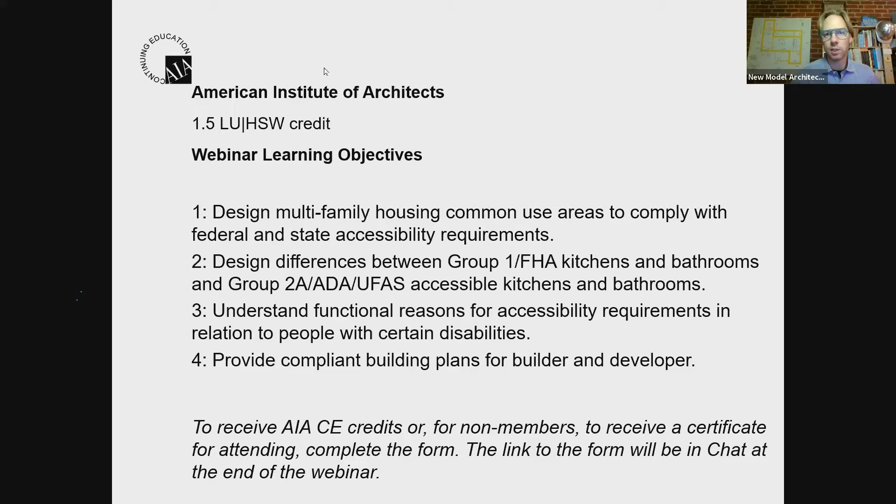Good morning, everybody. Welcome to part 2 of Untangling Housing and Accessibility Requirements in Massachusetts. Part 1 was on scoping, part 2 is on design. We've got some participants who are here this week who were not here last week, so I'm going to go over some very basic stuff just to introduce myself.

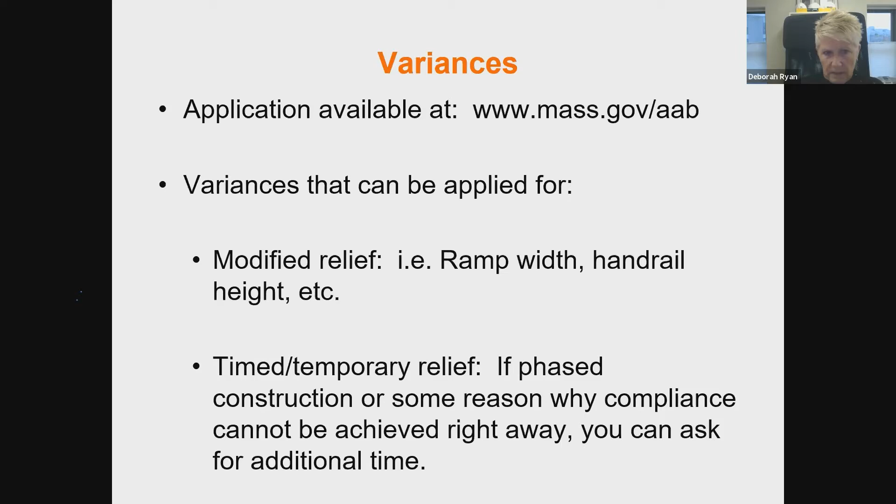So the variance, again, as I stated earlier, you can download the new variance application right on the web. You fill out the application and provide supporting documentation. I recommend that you make the application as clear as possible on the issue you are requesting. Plans, color-coded plans, photos of the issue you are requesting, extremely helpful. So if you're requesting a variance for the width of a ramp and it's existing, send a photo of the ramp, maybe with a tape measure on the ramp, show what the confining issues are, to make it easy for the board to understand what it is.

You're the one that's familiar with your building. The board generally is not, unless they happen to live in your community. So it's really helpful to give them as much information as possible. Next slide.

As part of the application, you have to fill out what I mentioned before, the service notice. You have to send a copy of your application to the local building official, the Independent Living Center, and the local Disability Commission. Those are the folks that are living in the city or town where your project is. And if they have any additional information or want to offer support or opposition, they will be able to do that. And there'll be a 2-week wait period for the board to receive any comments from them. Recently, again, the service notice you used to have to notarize. That has been done away with, which is great.

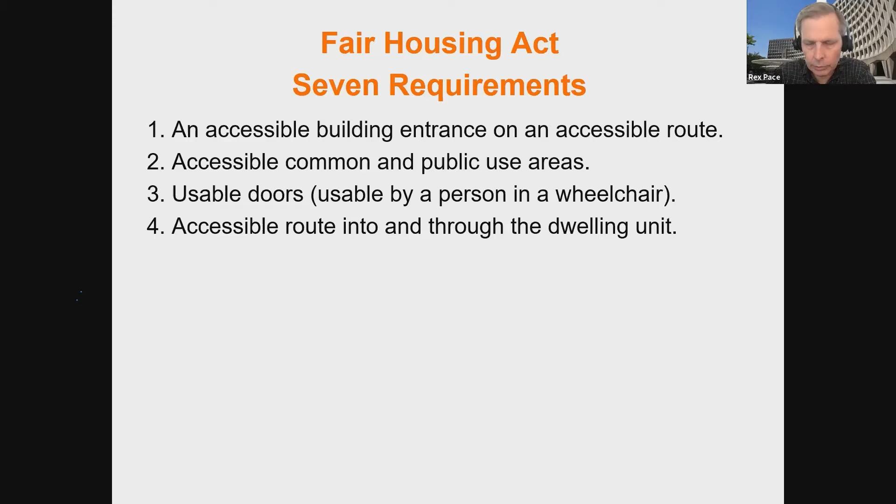And then there's a requirement for usable doors, which will be mostly like you think it should be, except in the interior of the units it's a little different than it would be normally. It's basically passage doors. Requirement 4 deals with the accessible route into and through the covered dwelling unit itself, which can be a little different than the public and common use spaces.

Number 5, again, this is in the covered dwelling unit itself. It's the requirement for accessible environmental controls, basically. And number 6 is the provision that requires reinforcing in bathrooms for later installation of grab bars. And number 7 regards usable kitchens and bathrooms. It's really about clear floor and maneuvering space in these areas.

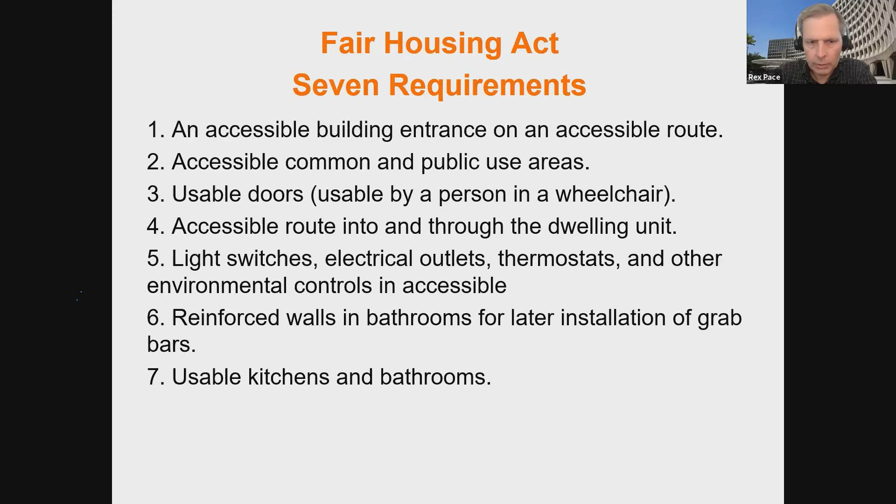So there's 7 requirements, although they do vary a lot in their scope. Some of them are very broad, some of them are very focused. In addition, one thing to keep in mind is that there's really not a standard for fair housing. It's not like a building code like you have for Massachusetts, or standards you have for the ADA or the Rehabilitation Act, Section 504. It really was intended to have guidelines to give builders and so forth flexibility.

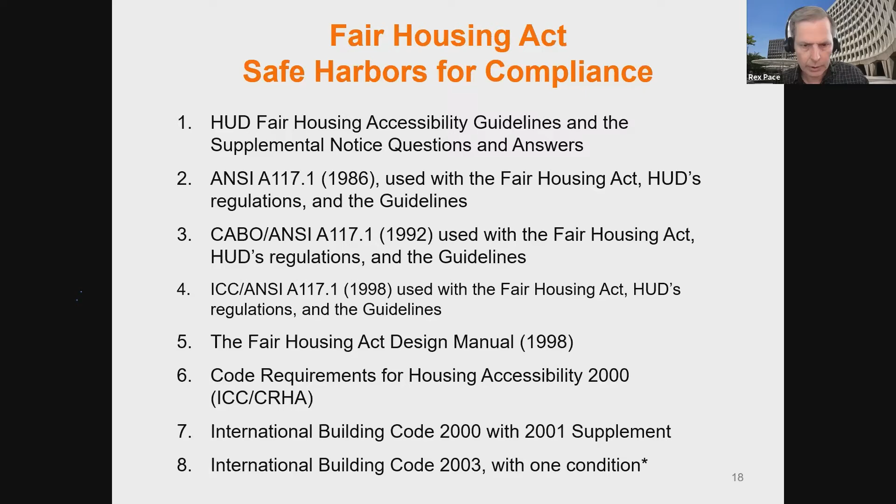And this is basically an effort to be consistent with the IBC, so that when a state adopts that code, you can follow the state code and have a pretty good assurance that you're meeting the obligations of fair housing. Just make sure that the state you're working with adopted one of the safe harbors on this list. And a very helpful resource is the Fair Housing Act Design Manual. It's got illustrations. It's what a lot of people refer to, and other than the guidelines themselves, it's probably the most commonly used safe harbor there is. So with that, we'll move on to the next topic.

Okay, so now I'm going to talk about the Rehabilitation Act, Section 504, as I discussed last time. These are the regulations specific to the Department of Housing and Urban Development. This is when you're a recipient of federal funding, and when you do that, you have to do requirements that are very much like you would find in the ADA for the 5% and 2%, which we talked about last time. These are the mobility accessible units, and the units that are accessible for people with communications disabilities, primarily hearing and vision disabilities.

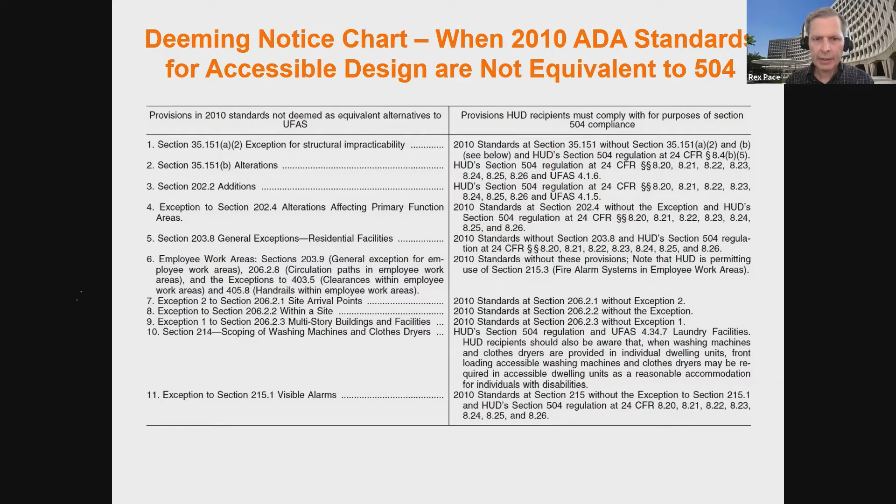Okay, so just to mention, it's not just HUD that provides funding for housing, although it is the main provider, but we also do have money from the U.S. Department of Agriculture Rural Development Programs, and they use UFAS as the design standard.

So unlike HUD, which has a section on housing in their 504 regulations, Rural Development Department of Agriculture does not have a section specifically on multifamily housing, and they just refer us to UFAS. So that's where we look to for all of the design standards if you're receiving federal funding from rural development.

Dave? Thanks, Kathy.

So I just wanted to take a moment to update everyone on the standards we have issued under the ADA that date to 2010. As Rex mentioned, there are some differences from the UFAS standard, which are really called out for purposes of anyone wanting to use the ADA standards but still meet some of the UFAS requirements that are more stringent. That's what would be necessary under 504, because so much housing covered by the ADA is also subject to 504 with respect to state and local governments.

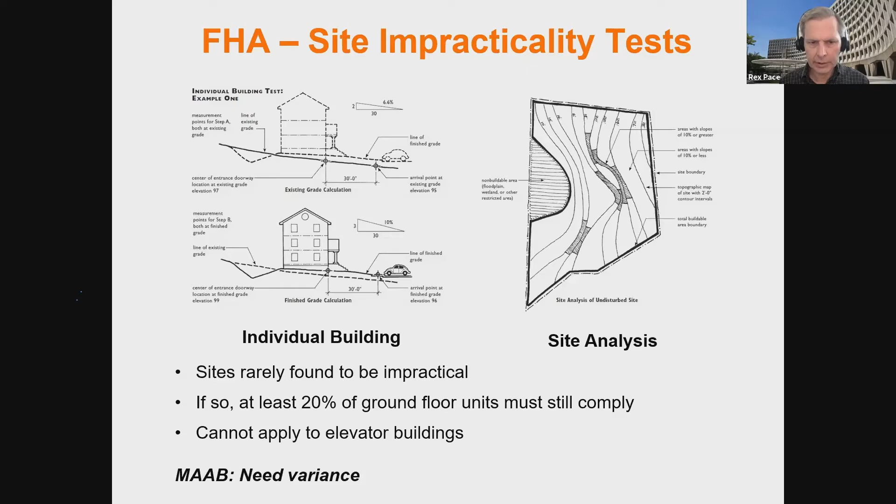And then another thing to remember is that this does not apply to elevator buildings. So we're only talking about buildings that are walk-ups. In Massachusetts, there is no exemption. You would need a variance, and again, you'd need to prove that it was either technologically infeasible or excessive cost without substantial benefit. Great. Dave?

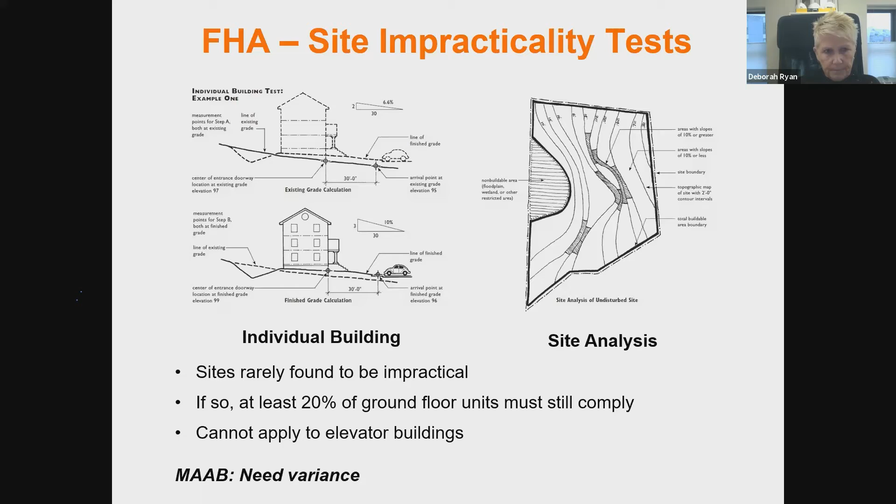Under the ADA, there is an exception based on structural impracticability, which is a very high test, because this is basically a basis for departure permitted in new construction. And it's really intended to cover those very unique and rare circumstances where compliance is not possible, even in new construction. It is not intended just based on, say, steep terrain. It's got to be involving more unique and impactful constraints in order for it to be used.

Now, we do want to point out that this exception previously used to be located in the substance of the standards, but is now located in the implementing regulations that are issued by the Department of Justice. So for tracking down this exception, you could find it in the Department of Justice's Title II regulation for state or local governments at the section cited here, 35.151(a)(2).

And with respect to Title III facilities, with respect to any kind of housing that is covered by the ADA in the private sector, again, functioning as a place of public accommodation, the exception for structural impracticability is found in the Title III regulation for commercial facilities and public accommodations at section 36.401(c).

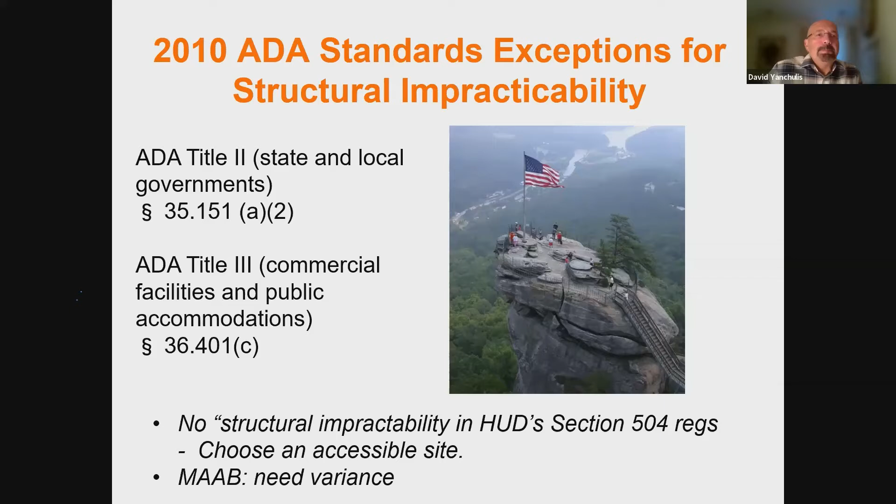Yeah, you could contact us or the Department of Justice for informal guidance on whether a certain issue or constraint for departure is, in our informal opinion, considered to rise to the level of structurally impractical. I really think it is something like you're seeing on screen. It really is something that severe.

Okay, let's talk about entrances. Deb? Sure. So under the AAB regs, all entrances to units in the building must be accessible. And one thing that the board has seen in the past is a facade trying to look like entrances with front stoops. If those are actually entrances to units, they all have to comply, even if there's a common corridor in the building that provides actually the main entrance to the unit. If these are used as entrances, they must comply with the requirements.

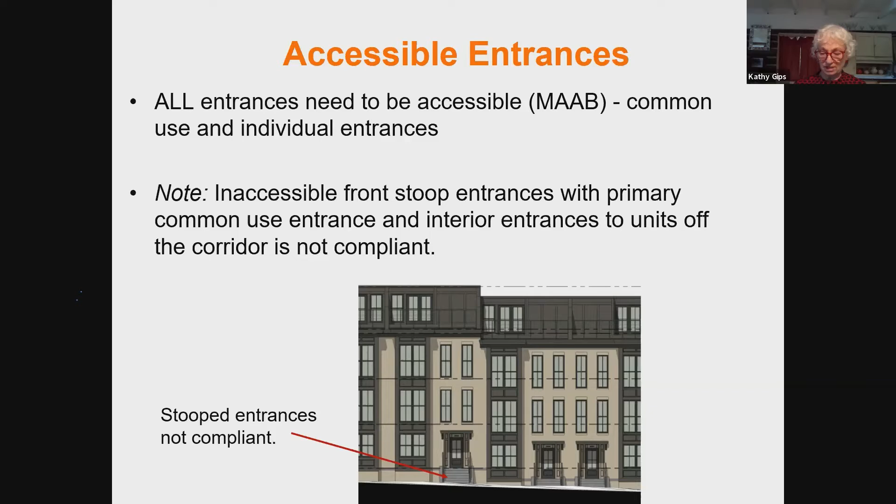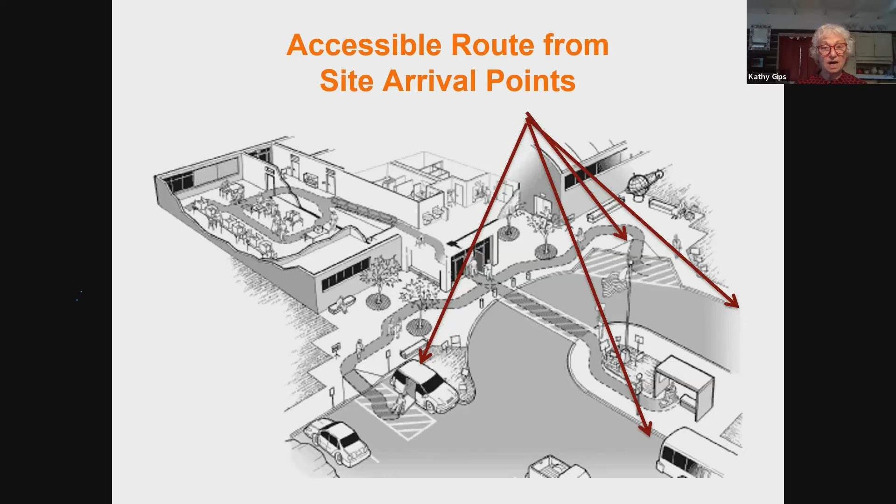Great. And we're not going to go over UFAS or ADA or FHA, since we're in Massachusetts and MAAB sort of covers it and tells us that all entrances have to be accessible. So accessible routes. We're looking for accessible routes from site arrival points, be it the sidewalk, the passenger drop-off area, the accessible parking, or if there's transportation on the site itself. Deb?

So accessible routes to common and public use areas. There's a lot of housing being developed where there are lots of activities going on the site. Some developments will have mail buildings, community centers, recreational activities, dog parks. All of the routes that lead to those facilities must be accessible. So anytime you construct a route on a site, it has to be accessible unless you get a variance from the AAB.

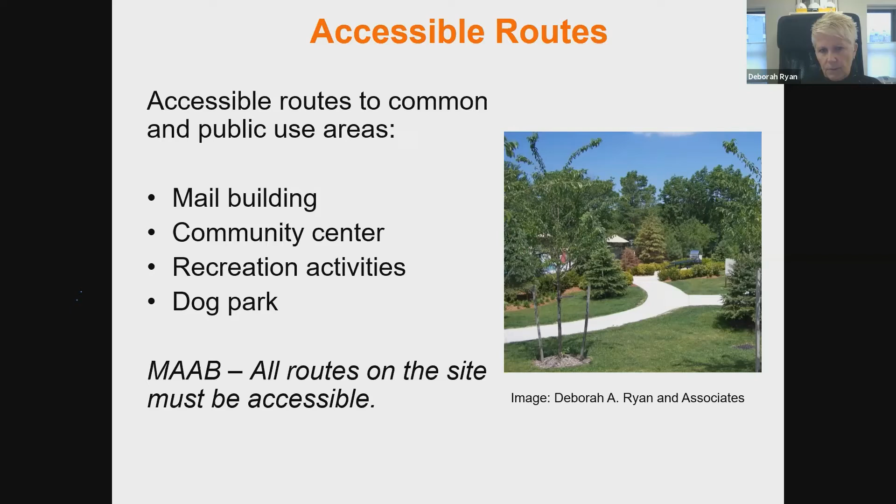Some of the things that I've seen out in the field and you need to watch out for is access to all of these kind of common spaces like mailboxes, being able to get up onto the sidewalk, access a mailbox if it's outside. Next slide. There are recreational areas such as picnic tables, places where people can go and hang out. Make sure you provide accessible routes so that all residents have access to those things.

Trash areas, a lot of developments will have one common exterior trash area. Make sure you have accessible routes to all the trash areas, not just one. And then I'm just going to bop in here to sort of remind everybody what the accessible route requirements are. I know most of you are familiar with this, but stable, firm, and slip resistant. So it doesn't have to be paved. It just has to meet this standard of stable, firm, and slip resistant. 36-inch minimum width, cross slope 2% maximum, and running slope 5% maximum.

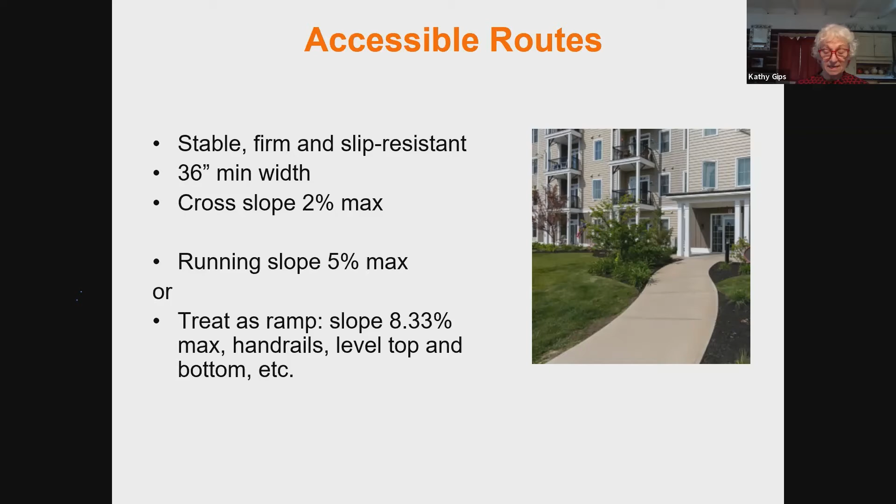And the reason I emphasize this is because I see a lot of sites where the running slope is more than 5%. And if it's more than 5%, it needs to be treated as a ramp. That means you're going to have handrails, you're going to have a level space at the top and bottom and every 30 feet. So it's going to be a lot more expensive, and it's a lot more difficult for people to traverse. If you've ever been in a wheelchair, or pushed somebody in a wheelchair, or rolled a heavy suitcase up a ramp, you know that it's fairly steep. So we really encourage people to get to that 5% or lower grade, also because if it's any steeper than that, it's considered to be a ramp.

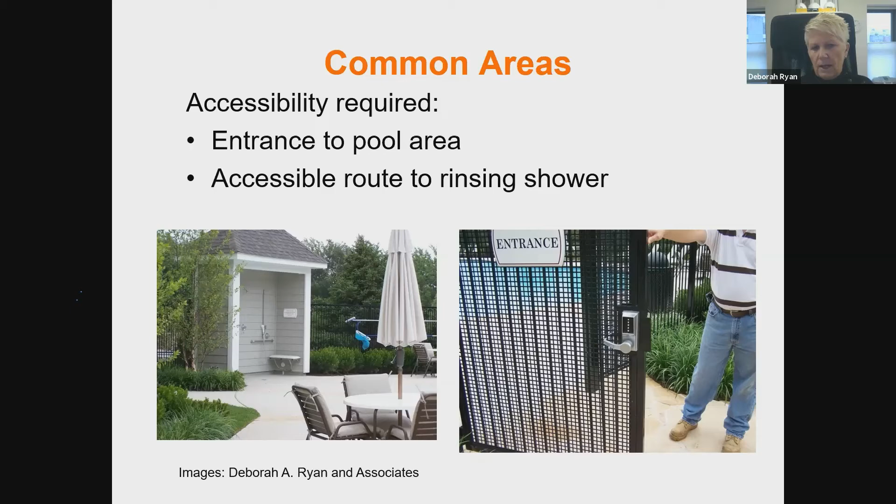Next slide. Also, accessibility is required to get into the pool area. I see a lot of pool gates where either the hardware isn't compliant or they fail to remember that you need the clearance on the pool side and you need to extend the walkway on both sides of the gate. Rinsing showers outside, you have to be able to get to them. Next slide. Laundry facilities, if they're a common laundry. Recreational areas, if you have paths that people are walking on.

Swimming pools, the AAB does require access into the swimming pool. It is not as specific as what is required under FHA or ADA. So there's a little difference in that, and maybe Rex or Dave can speak to that, but in the AAB, it just says a lift, but it doesn't tell you too much about what's required. Dave, you want to pop in here?

Yes. So the ADA standards have very descriptive requirements for lift or sloped entry access into pools, and they would be applicable to any kind of common use area, including a swimming pool provided on a facility covered as housing. Now, when we get the question about a privately owned condominium or apartment building, the ADA's coverage of pools and other common use areas, which again are very detailed, is only going to apply if the pool is more or less open to the general public as a public accommodation. If it's a common use area available only to residents and their guests in the privately owned building, it may not be covered by the ADA.

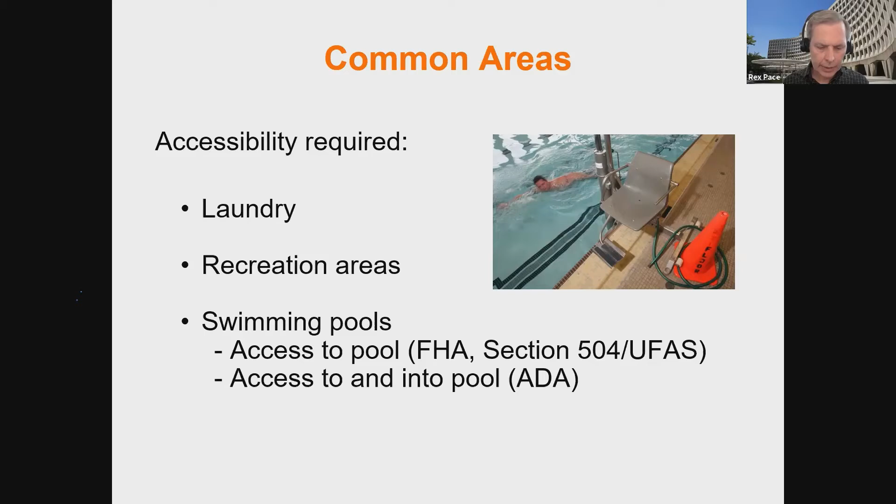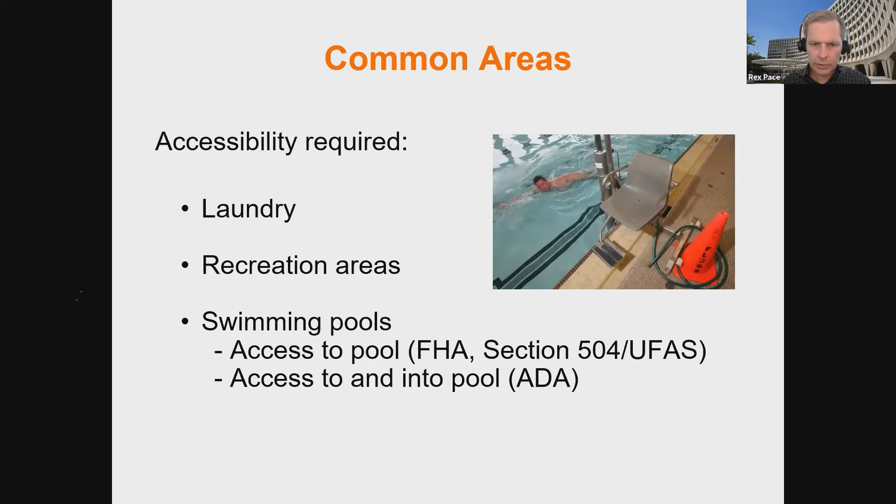And in regard to fair housing, the fair housing guidelines themselves are not nearly as comprehensive as the ADA. It's really, is the pool on an accessible route? Can you get to the pool? It has no requirement for a lift. However, if you're using one of the safe harbors other than the guidelines themselves, particularly the later ones, the IBC has a tendency to track the ADA requirements. So you may have a requirement for a pool lift or one of the other types of entries similar to the ADA. It's definitely at this point something I would go to the trouble to pay attention to and assess what's appropriate given the safe harbor you're using.

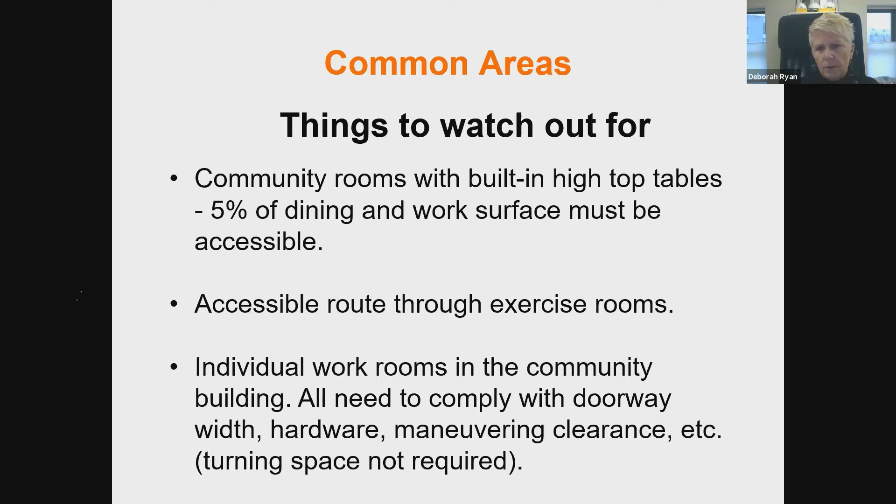Great. Deb? Yeah, things to watch out for that I see frequently. Community rooms with built-in high top tables. You need 5% of the dining or work surfaces to be accessible.

Lots of community facilities now, community buildings and market rate housing, are pretty elaborate, have bars and seating and all kinds of stuff. So just be cautious of that. A lot of them have gyms and exercise rooms. Make sure you have an accessible route to get through the room. Individual workrooms in the community building all need to comply.

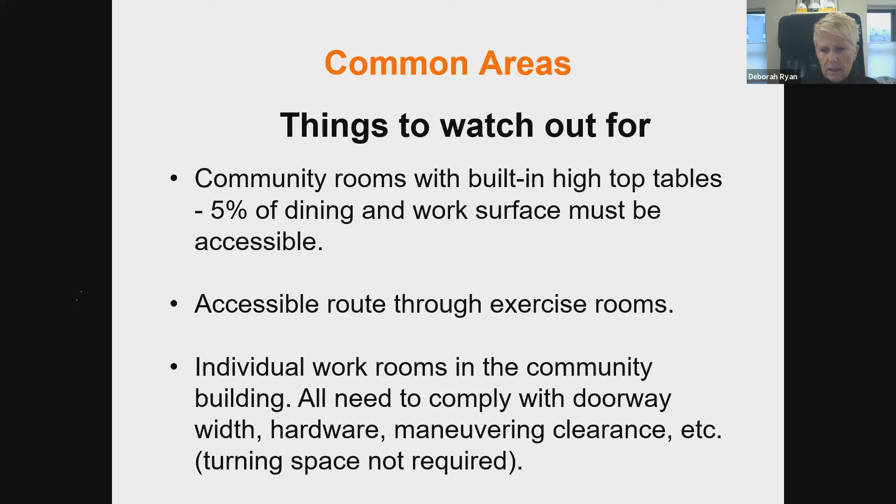I've seen places where there are small cabanas or small little meeting rooms or individual rooms where people can go work. Due to COVID, people might not want to work in their home, but can go into this little workroom. They all need to comply with doorway width, clearance, hardware, and maneuvering clearance. Turning space isn't required, but you have to be able to get in the room. As I said, individual cabanas on a pool deck I have seen, they all need to comply with the requirements.

Exterior bars, gas grills, all kinds of amenity spaces in multi-unit developments that I see that people get hung up on. So just make sure for gas grills, all the controls and operating mechanisms are within reach range, and that all amenity spaces be accessible. I've seen bocce courts and things like that.

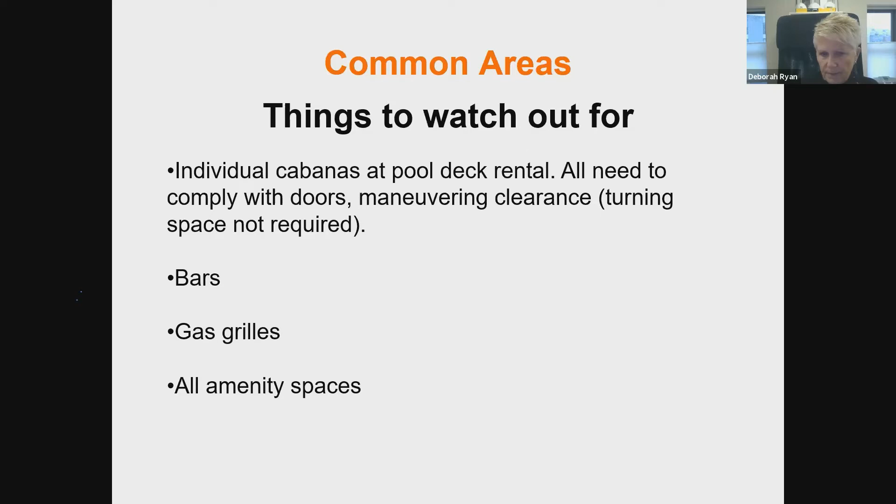So one of the other big ones that I see are dog washing areas. Make sure that the controls to operate the actual dog wash are within reach range. A lot of that is dependent on the equipment that's provided, but you want to make sure that you can access the controls for those things.

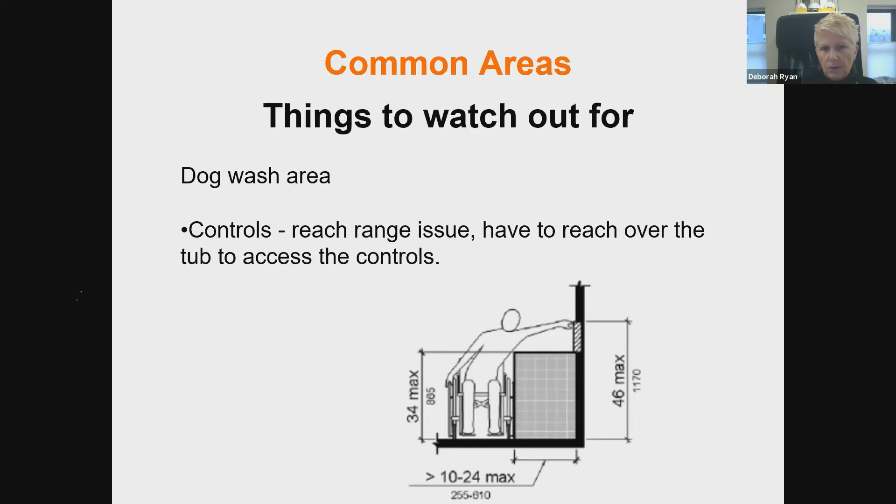Mailboxes are another thing. Sometimes there's a little bit of confusion between the U.S. Postal Service and what the accessibility requirements are, but MAAB still allows a 54-inch high side reach. So all mailboxes would be required to be no higher than 54 inches to the highest operable part. ADA goes down to 48, but Dave can speak to that, only serving the accessible units, I believe.

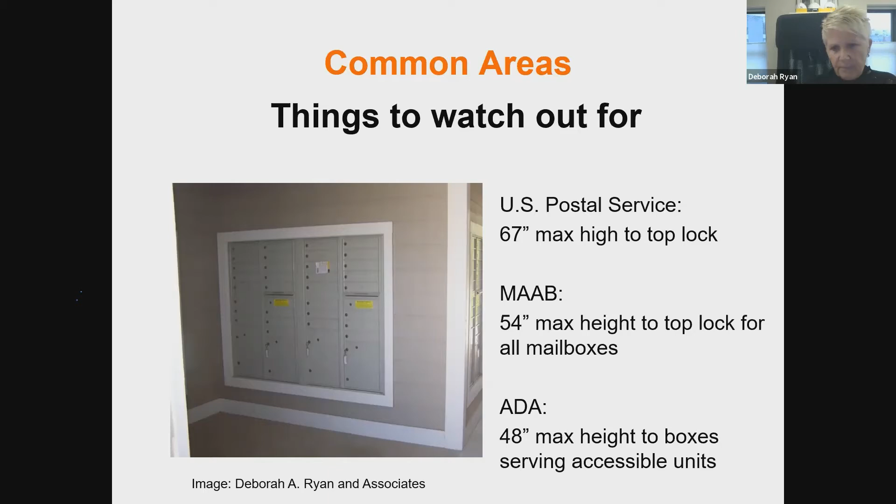That's correct, Debbie. So mailboxes for the 5% of units required to be mobility accessible would have to be within accessible reach range of maximum 48 inches. So that's a little different than the MAAB.

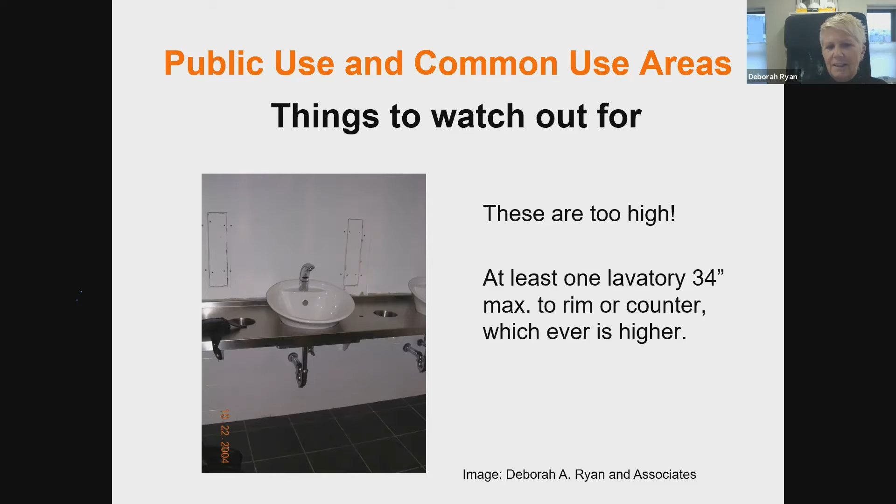Okay, just talk a little bit about vertical access in the building, because this is probably one of the most frequent questions we get: is an elevator required in my multifamily housing new construction? And just to clarify, an elevator is not required as long as the residential dwelling units with mobility features, the common use areas that serve those units, and the public use areas serving the residential dwelling units are all on an accessible route.

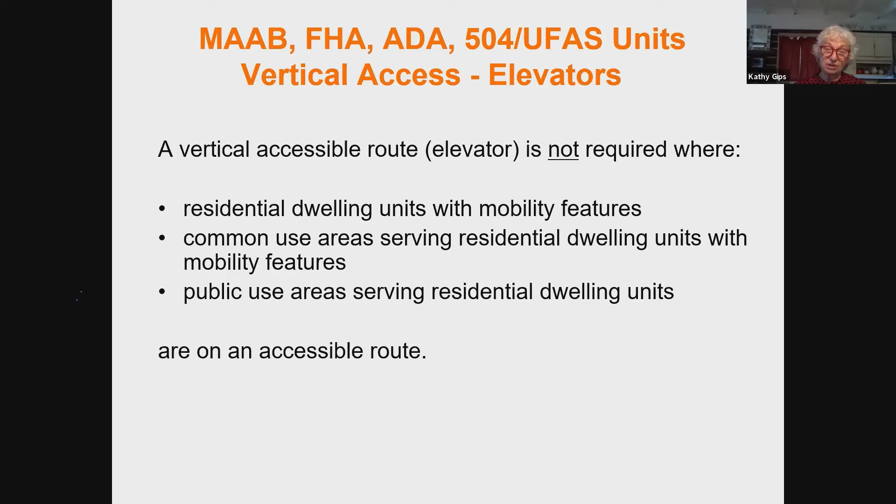So if you have a two-story building, let's say, you're not planning to put in an elevator, and you have all of the accessible units on the first floor, that's fine. And you're not required to have an elevator in the building. You just need to make sure that somebody can get to all the common use areas that serve it, the public use areas that serve it. So generally an elevator is not required, but Rex, do you want to pop in on this one?

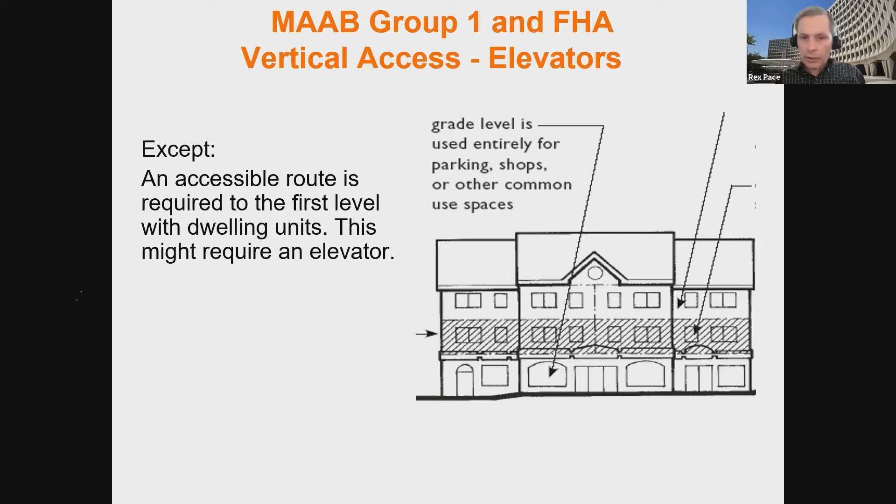Yeah, so as we discussed last time, all ground floor units are covered. Sometimes, from an outward appearance, a building doesn't seem to have ground floor dwelling units, but in fact, your first story of units will be your ground floor. For instance, here we have shops and so forth underneath, and those single story units above do have to comply with fair housing. So let's go to the next slide. Now, you're not required to necessarily have more than one ground floor.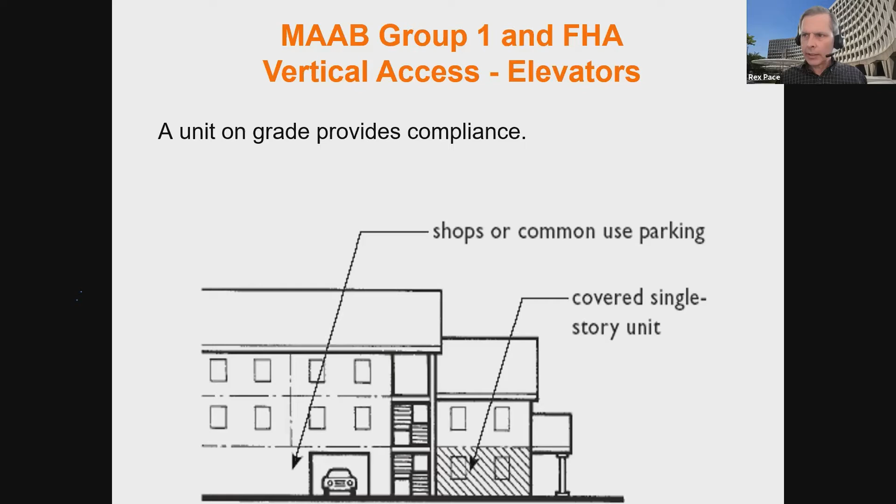Did you have any comments on this, Deborah? No, the AAB would be the same. Okay, I just want to make sure. So I think that pretty much covers it. Did you have any other questions, Kathy? No, that's great. So we're going to get right into the dwelling units. We've covered sort of getting to the dwelling units, and now we will talk about the dwelling units.

Rex? So the fair housing guidelines require for the units that are covered that you have an accessible route that goes into and through the unit and takes you to all the areas that are going to be used. There are a few notes I would make about this. For instance, once you get inside the unit, you don't have to provide maneuvering clearances at the doors. If a unit has a loft, it's still considered a single story unit, and there are certain stipulations on that, but you wouldn't have to have the accessible route to the loft or to an unfinished basement.

So there is a requirement for an accessible route. The route itself is very much like you would find in something like the ADA, but the extent of it will probably be less. Great, and I think this is a good time to clarify for all of the laws that we're talking about what the requirements are for interior doors in the unit. So Deb, anything group one or group two?

Yes, so under the AAB, all doors within a group one unit, as well as group two, need to comply or be capable of complying with the requirements. So for the maneuvering clearance on doors, for example, you can have a door swing in and not have the 18 inches of clearance on the pull side if it can be adapted in the future to provide that clearance. So the way the language works is it either complies or is capable of complying. There are no exceptions for sunken living rooms or dining rooms or lofts. They all have to be on an accessible route. I'm glad you mentioned that, Debbie, because you do have some provisions for sunken areas, like in living rooms. They are permissible to an extent.

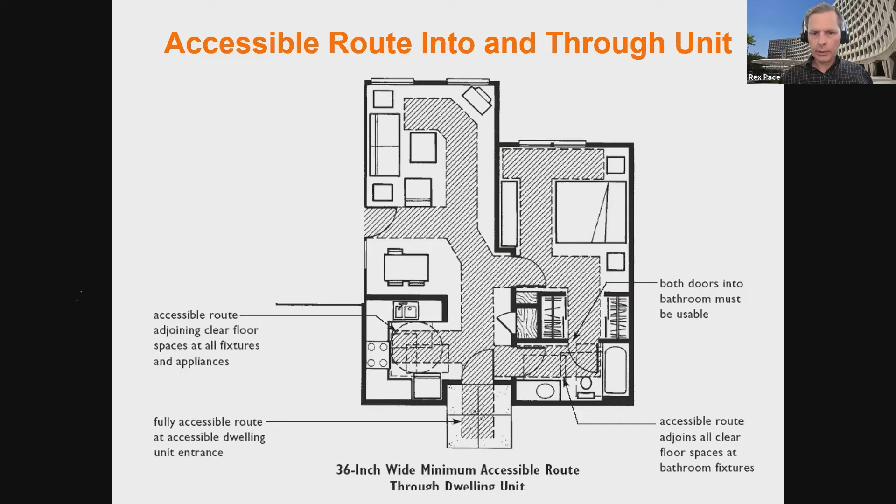So now another thing about the accessible route requirement under fair housing is it does have some differences in what's a permissible change in heights from interior to exterior spaces that would probably exceed what would be permissible under the ADA. And this is at the secondary entrance. The primary entrance is going to pretty much track what's in the ADA on the exterior side in terms of the threshold, like your entry door into the unit. But if the secondary entrance is out to a balcony or a patio, they're going to be a little different.

First off, if you have a pervious surface, like a wood deck, you can set that deck a 1/2 inch below the interior floor level. So then you would additionally have the permissible height threshold. So you can see that's probably going to be something that would not be permissible under the ADA, because it's going to be too much of an overall height change for an accessible route.

Now, the big difference is when you have an impervious surface, such as a concrete balcony, for instance, you're permitted to go 4 inches from the interior finished floor level down to the top of that exterior impervious surface. So that's a pretty big difference. The belief is that you could come back and modify that with a raised deck. There's a little image on the bottom of the slide that shows where somebody's done an insert that would raise up that level. So the idea is that a later tenant modification would be possible to address this.

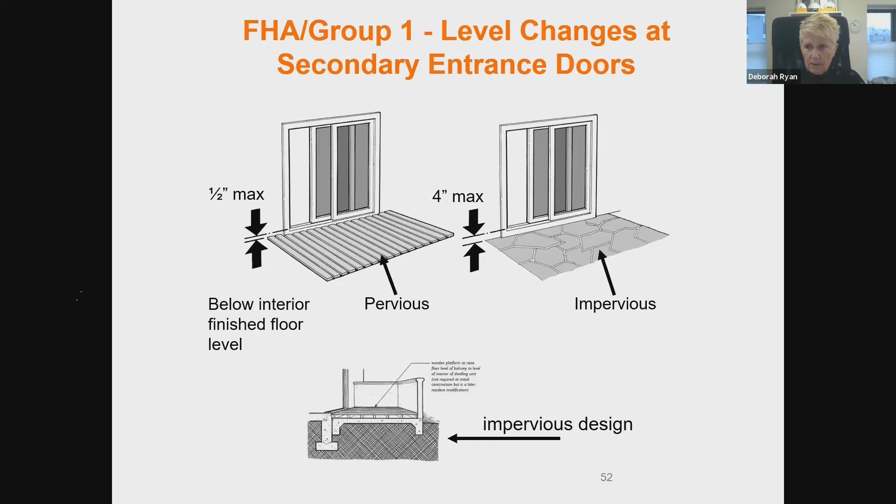You should be capable of providing raised decking, which would be level with the floor inside. One thing to be cautious about is that if you do provide that raised decking, you should check the height of your handrails that surround the deck, because by building code, they may have to be a certain height. And once you add raised decking onto that, you may be below that. So something to look at.

Great. And Dave, for the ADA units? Yes, this is an important difference because the ADA standards are more stringent in that they don't really provide any allowance for the transition from interior to an exterior space. You need to treat it as any other door threshold, which would permit a 1/2 inch maximum for the threshold or change in level. If that threshold is higher than 1/4 inch, it has to be beveled, maximum 1 to 2, but the total change in elevation can't exceed 1/2 inch.

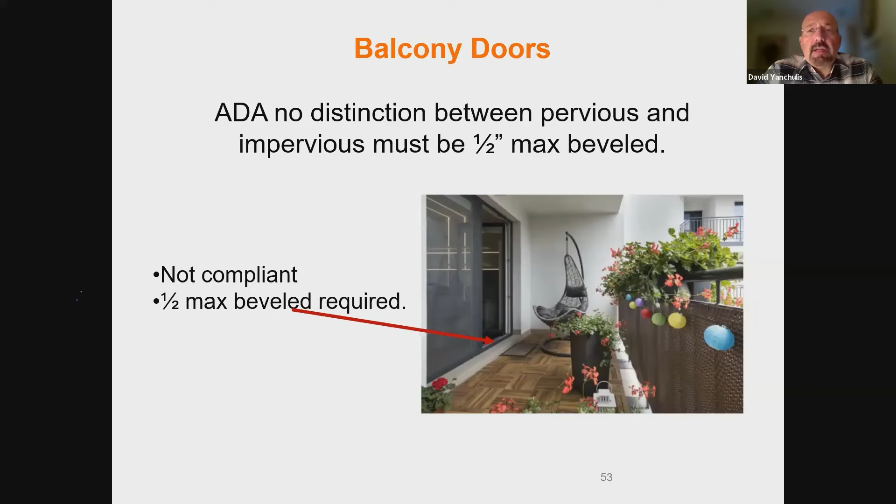Okay, Deb? Okay, so things to look out for with controls and outlets. Although this is actually an FHA requirement, not an AAB requirement, because AAB has not amended its regs to bring the reach range down to 48 inches. But so for switches, light switches and things like that, 48 inches maximum.

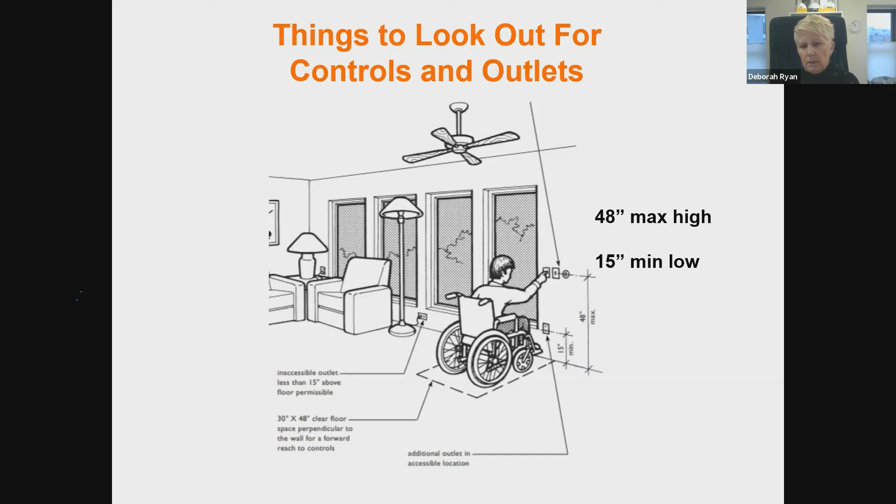To the highest operable part, I usually recommend that people put the electrical box at 48 inches to the top of the box, so they'll always ensure that 48 meets the top of the switch, because depending on the type of switch you install, the actual top of the switch could be higher than 48. So putting the box in at 48 to top of box will take care of that. And then the lower outlet's 15 inches. So it's making sure you check before the sheetrock goes up, so you don't have to undo it. It's easier to move the box during the phase on the left than it is on the right.

Things to look out for are the outlets underneath windows. Because the electrical code requires outlets so many feet, you may end up with an outlet underneath the window, and technically you need to request a variance from the AAB if you cannot meet the 15-inch minimum to the center line of the lowest receptacle.

So Deb, I had a question. Go ahead. Are all controls covered under the Massachusetts code? Yes. All right, so in fair housing, so it is more stringent. In that respect, I want to point out, because it's less stringent in fair housing, you do have in the guidelines a little bit of a stipulation for what are called comparable controls. For instance, if you have 2 light switches that operate the same light, it's possible that you could just do one. Right. It really depends on the situation. You need to be careful with that, because it really is intended for redundant controls.

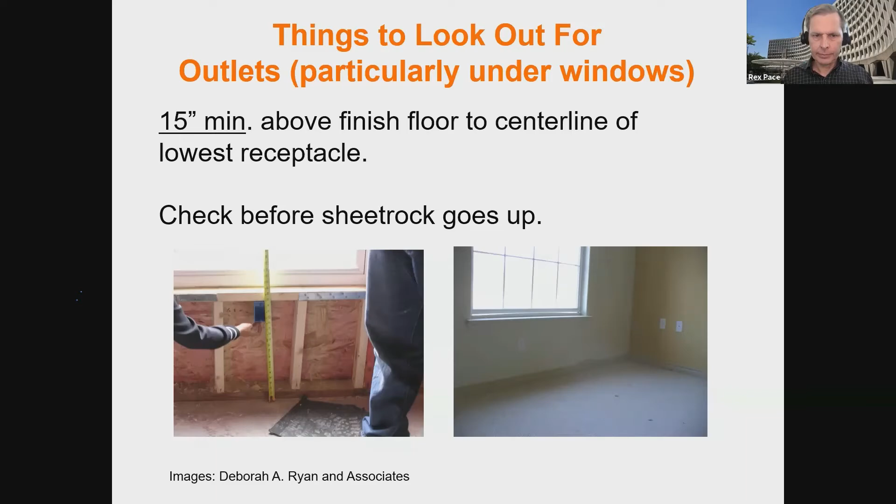Yep. Great. All right, we're going to get into the bathrooms and the kitchens for Group 1 and the Fair Housing Act units. So Rex? So this is requirement, I believe we're on requirement 7 of the design and construction, which really deals with the clear floor spaces in bathrooms and kitchens. Right now, we're going to talk about bathrooms.

You'll see clear floor spaces for toilets are very similar looking to what you see in UFAS or ADA, but they are very different in that, for instance, things can overlap the clear floor space that would not be permissible under the ADA or UFAS. For instance, here we see that the bathroom vanity is overlapping the space for the toilet, so be careful about that. You're required to have a 30 by 48 inch space at the lavatory.

This can be forward or side approach. Again, a big difference. You don't have to have a knee space. You can do forward approaches, and that may actually be for other design reasons desirable in some instances. If you do that, you are permitted to have an adaptable cabinet, and we'll talk a little bit more about that in a minute.

And there's also, I don't recall, Kathy, if we were talking about A and B specifications, but you do have 2 different specifications you can use for bathrooms that do change things a little bit. Primarily the maneuvering space at a bathtub is what it really affects. Under the one specification, the toilet could be next to the tub. Under the other specification, specification B, you have to have the 30 by 48 clear at the control wall of the tub.

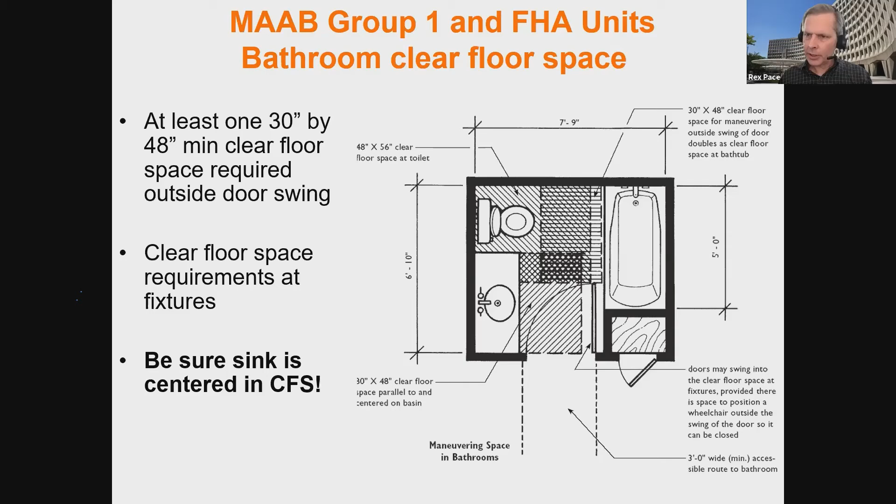And I think that pretty much covers it, Kathy. I think we'll go into a little bit more detail as we go along.

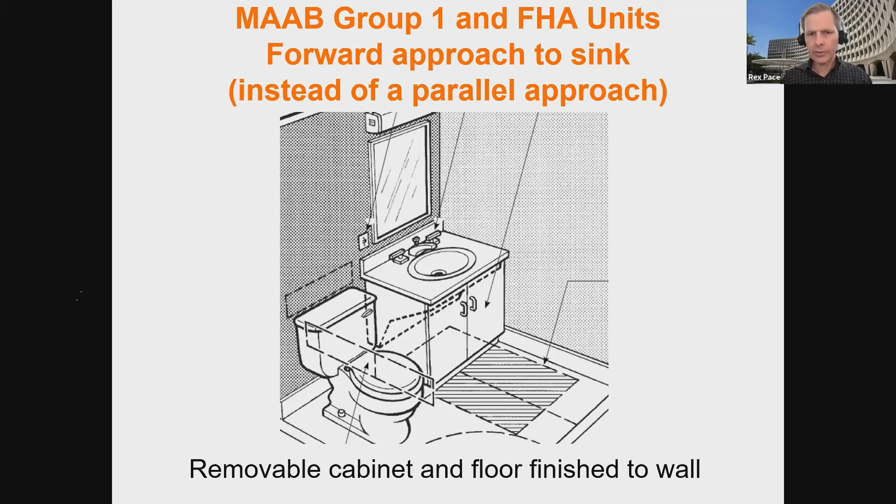Here again, I was talking about an example, particularly in some of the situations where powder rooms have to comply, which is really not that often. It's really when you have a multi-story unit that's covered, like in an elevator building, and it's the only bathroom on that floor that's covered by the Act. But you would have a removable base cabinet as shown here instead of a parallel. And like I say, there's other instances for design reasons you might want to do it.

Next slide, please. But this is a good illustration when I'm talking about the cabinet can be removable. And really the key thing is that the floor beneath the lavatory has to be finished up to the wall. That's really the thing that describes it as being adaptable, so to speak. You just can't take a typical vanity and just tear it out and claim you comply. Also, you have to be a little bit careful with the height of the lavatory, and the Type B specification does have a maximum height requirement, so that might affect your cabinetry design too.

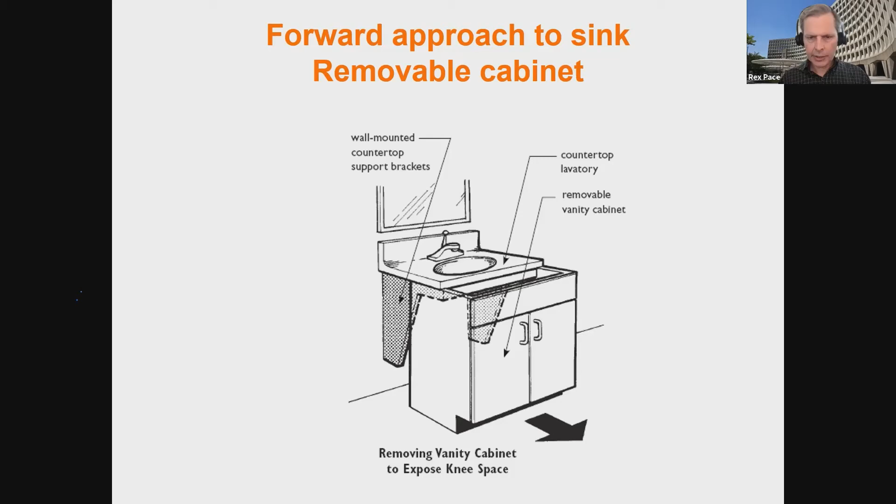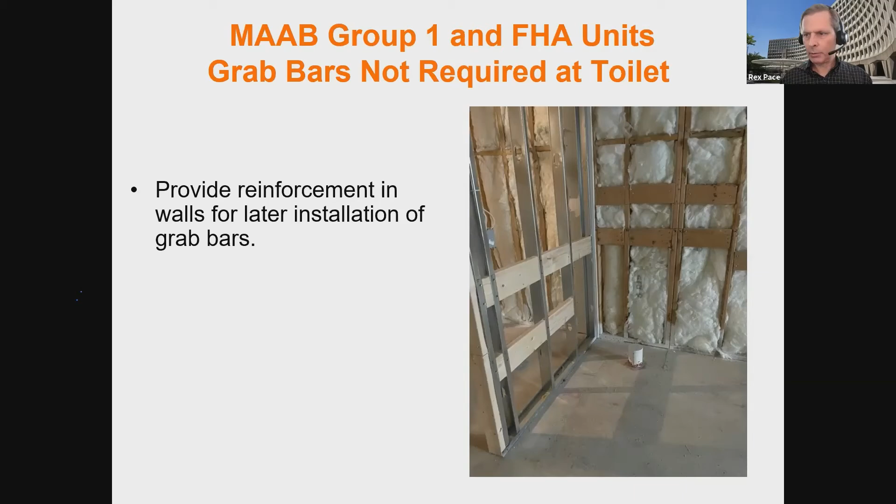So with that, we'll go on to reinforcing. You don't have to provide grab bars up front in a fair housing covered dwelling unit. What you do have to do is provide reinforcement for later installation of grab bars. These areas are smaller than those required under UFAS or the ADA, and certainly the Massachusetts code, as Debbie will take us into now. Are you going to talk about that now, Debbie? Deb's going to talk about it, so I think it's a good segue here, because this will probably supplant anything fair housing is going to require.

So the reinforcement for grab bars around the toilet is pretty similar to FHA, but the reinforcement of the walls behind a tub and a shower is different. For the shower or the tub, it is required to be on all 3 walls, and for the tub 60 inches above the finished floor. That photo happens to be of a group 2 tub because the controls are on the long wall, but definitely more blocking is required on the surrounds of tubs and showers.

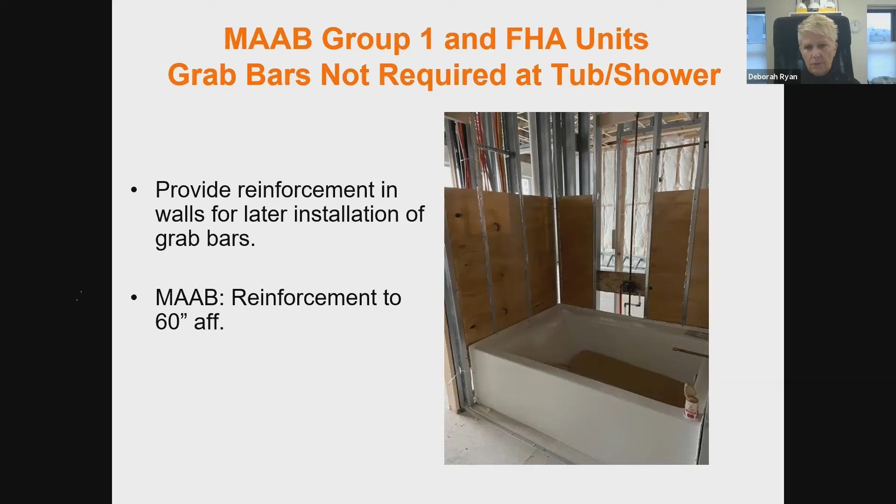Be careful with prefab showers. Make sure the reinforcing is attached to the actual prefab unit. You cannot have that gap between the unit and the wall. The actual reinforcement has to come from the factory or be installed on the unit itself, not where grab bars might be, but where the AAB requires the reinforcement.

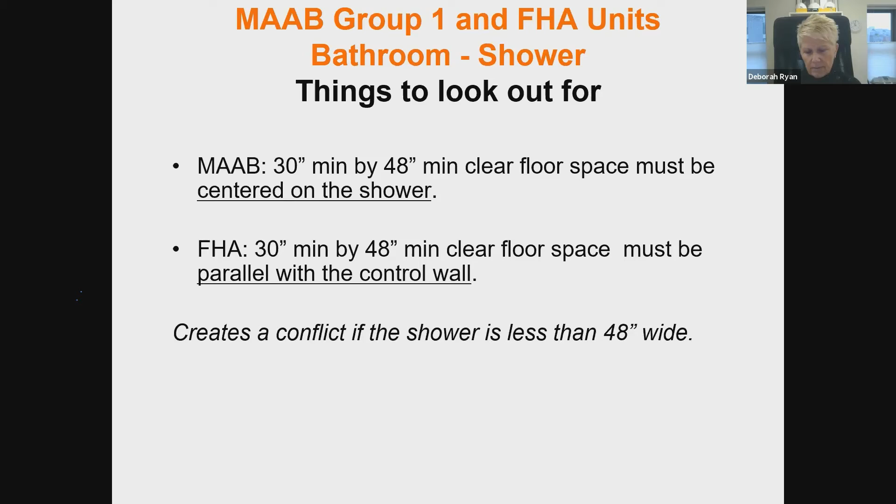One of the big differences between FHA and AAB is in the shower section for a group 1 shower. The 30 by 48 inch minimum clear floor space under the AAB must be centered on the shower, and under FHA, the 30 by 48 minimum clear floor space must be parallel with the control wall. So if your shower is less than 48 inches wide, there will be a conflict and you will have to have some offset on either side. So next slide, I think, shows.

So if you have a 48-inch wide shower, then you will comply, because as long as you don't have a sink or toilet in the clear floor space, the 30 by 48 is, in this instance, parallel with the control wall and also centered on the shower. It's when you get into maybe a 3 by 3 shower that it creates a problem.

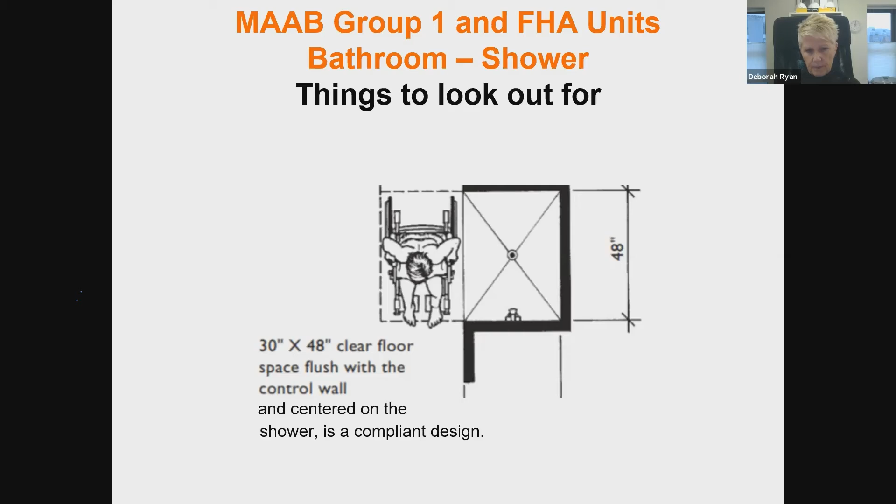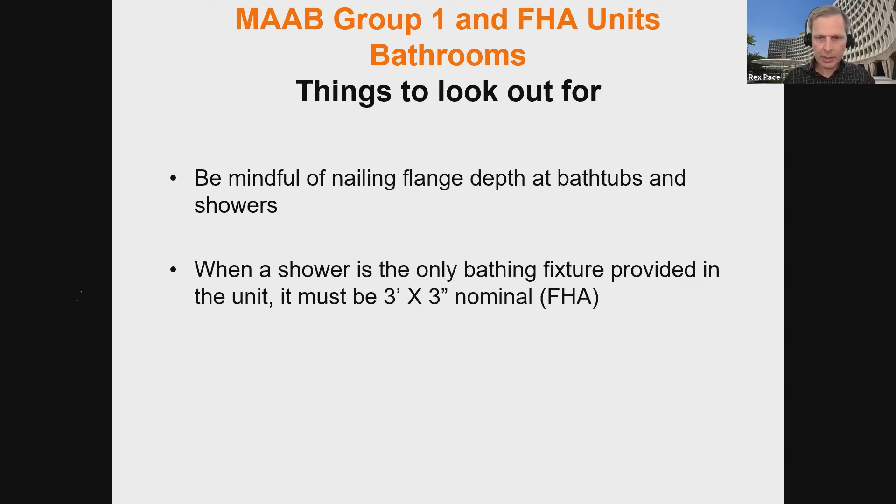Rex? Yeah, so another thing you want to be careful about is what we call the nailing flange issue. A lot of times the prefab showers are molded so that the flange sticks out perpendicular to the face of the unit, to the entry of the units. The idea being that you're going to slide the shower or bathtub in place, and you're going to nail it to the stud, and then you'll cover the stud, which makes sense

from a construction point of view. But what it does is that it essentially pushes the clear floor space away from the fixture at the ground floor level. So you really want to be careful when you pick showers and tubs that the nailing flange is either turned back at 90 degrees, so it's a non-issue, or that it's minimized. It's kind of hard to completely make the face of some of the fixtures flush with any adjacent wall. It's not really conducive to some construction issues, but you do want to minimize it

as much as possible. So you want to be careful, for instance, if you let your bathtub define the overall size of one portion of the wall, because it may wind up being less than 5 feet and you'll have problems. And you don't want any of the trim work or anything around the flange to push the clear floor space so far away from the tub it becomes ineffective.

Same thing for shower. Under the ADA and UFAS, this becomes a really big issue, because for a transfer shower your clear floor space is supposed to be almost flush with the threshold. So you want to be careful. There's a much tighter requirement on that, and you might want to speak to that for a minute, Deb.

But another thing I would point out, when the shower is the only fixture in a fair housing covered unit, then it must be a nominal 3 by 3. A lot of the illustrations in the design manual show a 3 by 3 shower. I think that's a good idea, but it's not necessarily a requirement. It's only a requirement when it's the only bathing fixture. You could have a tub, and then this wouldn't apply. It's the only bathing fixture in the unit, so keep that in mind.

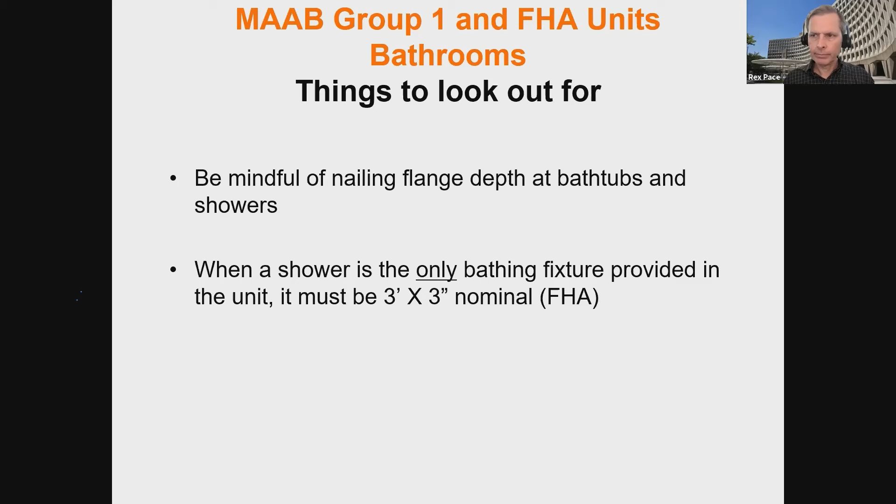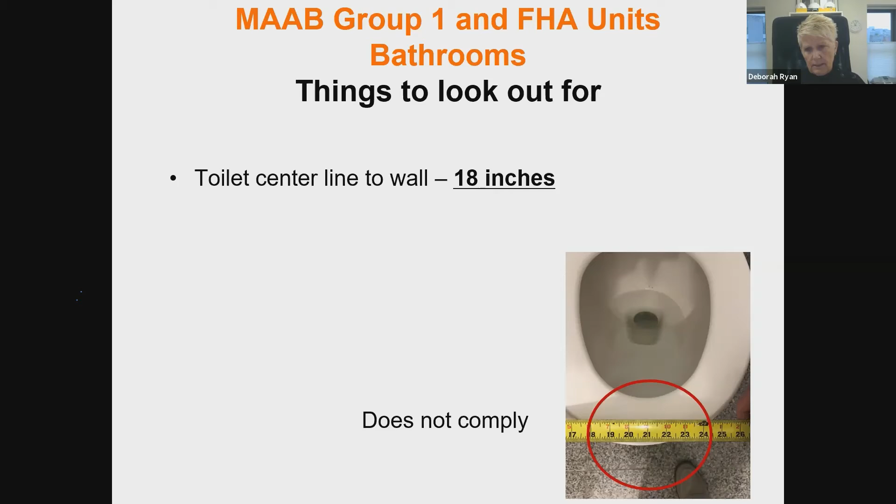Deb? So things to look out for is the center line of the toilet from the wall. You want to be 18 inches spot on one side, and on the other side, it's a 15-inch minimum. So what I've seen in the past is that the 18 and 15 is basically 33. And if you have a plumber that's not too familiar with the FHA or AAB requirements, they may center the toilet in that 33-inch dimension.

So you need to be careful. It's 18 on one side and 15 minimum on the other. So 33 is what you have to have if you have a sink next to the toilet. You need to have 33 inches from the sidewall to the edge of the counter of the sink or vanity.

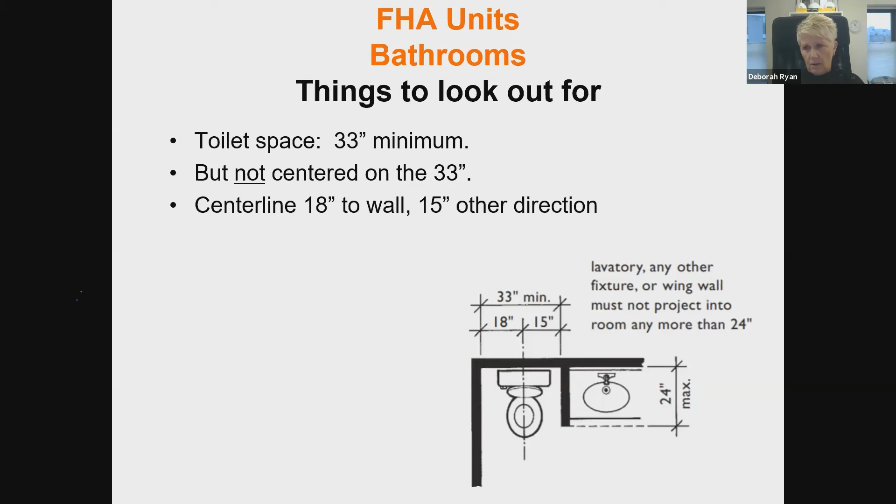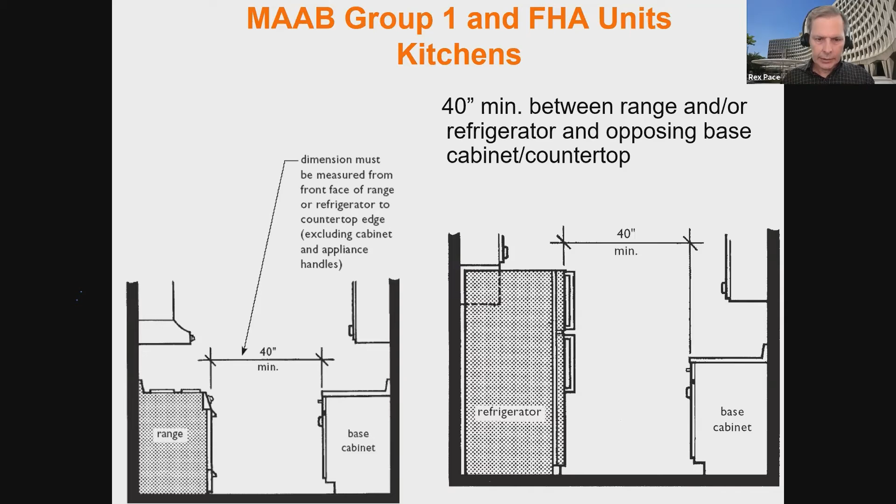Rex? So the Fair Housing Guidelines has a requirement for a 40-inch clear space in kitchens, and this is taken from the face of appliances to the opposing countertop edge. So you want to be careful when you're laying out a kitchen that you account for this minimum clearance, because sometimes kitchens are laid out generally and then finished out at a later point, perhaps the selection of appliances will change or the nature of the counter. There'll be different options for different countertops and different units. So account for this 40-inch minimum clearance.

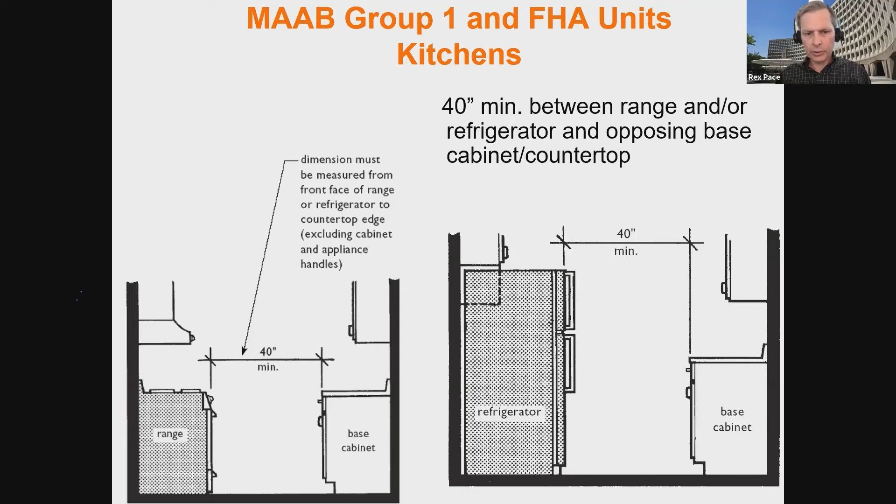And it's one of the big deals in fair housing in regard to kitchen design, because it has a very similar requirement for the 30 by 48 clear floor space of the appliances, but it's also relying on this overall clearance between opposing counters, fixtures and cabinets to provide adequate maneuvering space in the kitchen, particularly if you have both a standing person and a person using a wheelchair trying to use the space together. So there is a.

Oh, yeah, go ahead. No, sorry. I'll let Deb take this one.

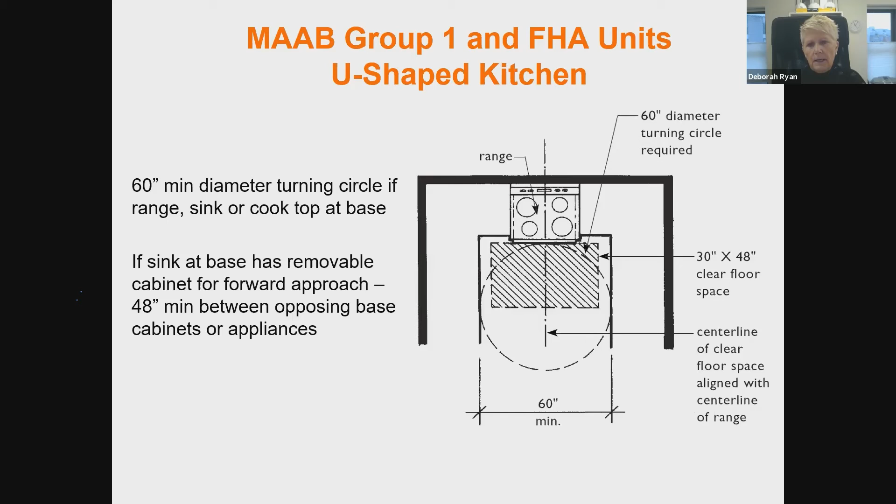Oh, okay. So under FHA, as well as under the AAB, if you have a U-shaped kitchen and you have a range or a sink or a cooktop at the base of the U, you need to have a 60-inch turning circle in the kitchen. The only time you can reduce that, and I don't think I've ever seen it, is if you have clear open knee space underneath the range or the sink at the end of the U. So this is in a group 1 kitchen, not a fully accessible group 2 kitchen. U-shaped kitchens have to have a 60-inch turning space.

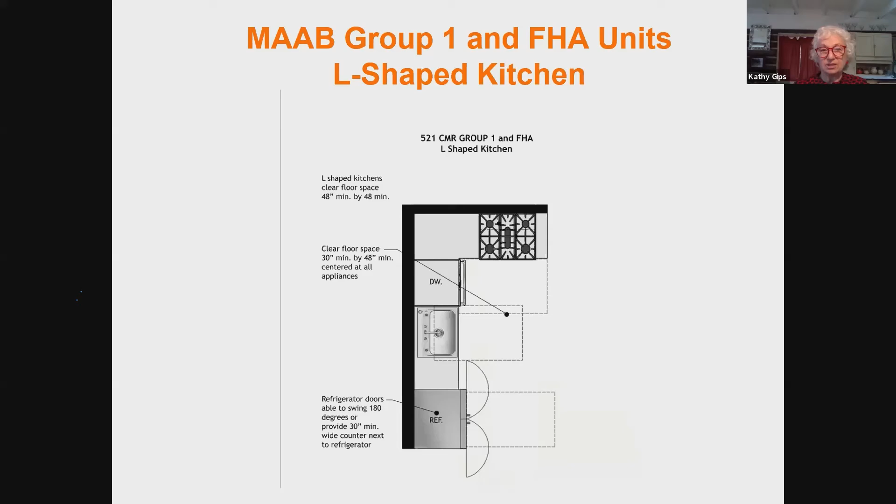And in the L-shaped kitchen, there's a recommendation. You'll see it if you use the design manual. The Fair Housing Act design manual talks about the outlet being 36 inches from the corner so that it's easy to reach. That's a recommendation. It's not a requirement. Some of the ADA things, some of the AAB things, have to do with the sink bowl depth being 6.5 inches maximum.

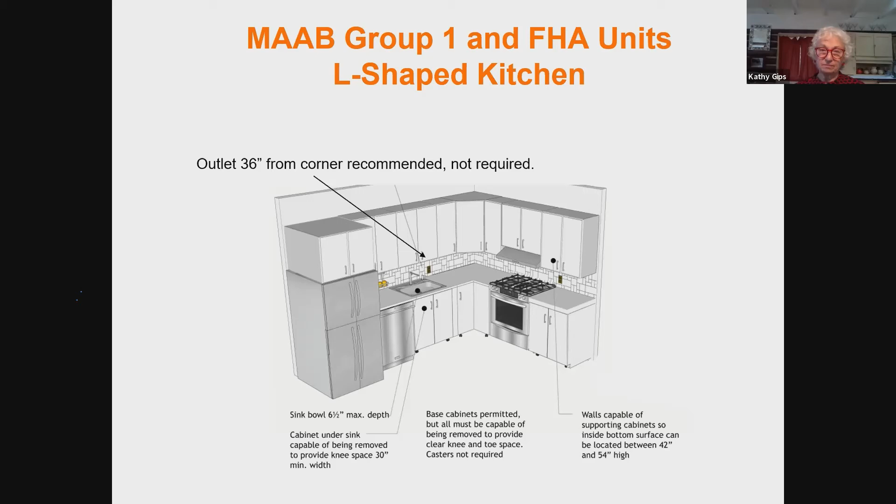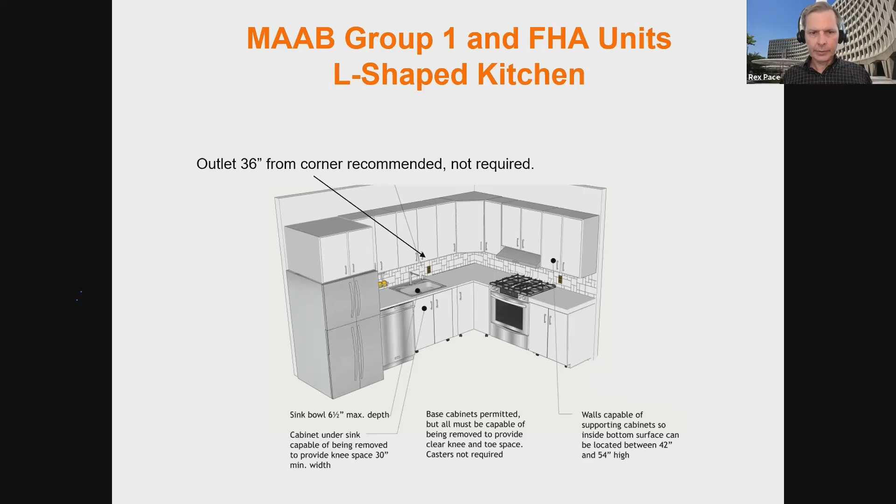So Kathy, I have one very technical comment on that. I probably should have been clear the other day when I was talking with you. The guidelines themselves have no requirement for the 36 inches from the corner. That's true. It really was essentially a recommendation in the Fair Housing Act design manual. If you're using the design manual as a safe harbor instead of the guidelines, which you can do, I probably would do the 36 just because it's in there. But technically the guidelines do not specifically require this. Great, thanks. And you can go on to this one, Rex.

Okay, so in fair housing kitchens, you're required to have a 30 by 48 inch clear floor space at the appliances. There are a couple of instances where they have to be parallel, and that is for a range, or a sink that doesn't have a knee space. Well, essentially, if it had knee space, it'd be centered too. And you will note that the clear floor spaces have to be centered.

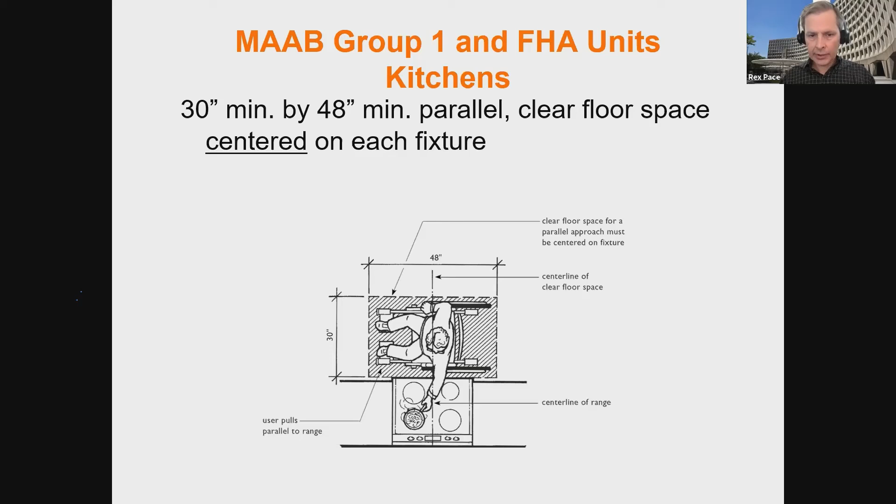This is unlike the ADA or the UFAS standards. The ADA only very periodically requires center lines for clear floor spaces. Usually it doesn't. But in fair housing, that's a big deal. Those clear floor spaces have to be centered. So was there anything else with that?

Oh, yes. So let's talk some more about those appliances, because again, this gets back to the 40-inch minimum requirement and the location of clear floor spaces at these fixtures, particularly when you have a range next to a sink and a potential conflict between parallel approaches.

Deeper appliances are becoming more common. This has somewhat to do with the fact they're energy efficient and have more insulation, so they wind up being bigger appliances than in the past, which I think is great that they're sustainable, but they do have an impact on the kitchen layout, so keep that in mind. You might want to give additional space in the kitchen to account for these appliances.

I guess you had some comment here too, Debbie. Well, I just have a comment about when you're measuring the clearance. It does not include handles. It's from the face of the appliance. It doesn't include the door handle or anything. Yeah, and fair housing is consistent with that too.

Okay, so moving on to the larger units, the group 2 ADA UFAS units, we'll go through the bathrooms and the kitchens.

So I guess this is me.

So for the group 2 units, there is an additional requirement for clear floor space at fixtures. Anybody who's done work in Massachusetts over the years, these are the old 5% fully accessible units, but you don't have to install the grab bars at initial construction. A lot of this stuff is capable of being provided, but the space needs to be there. You need to have a forward approach to the sink, so you need to have clear floor space under the sink.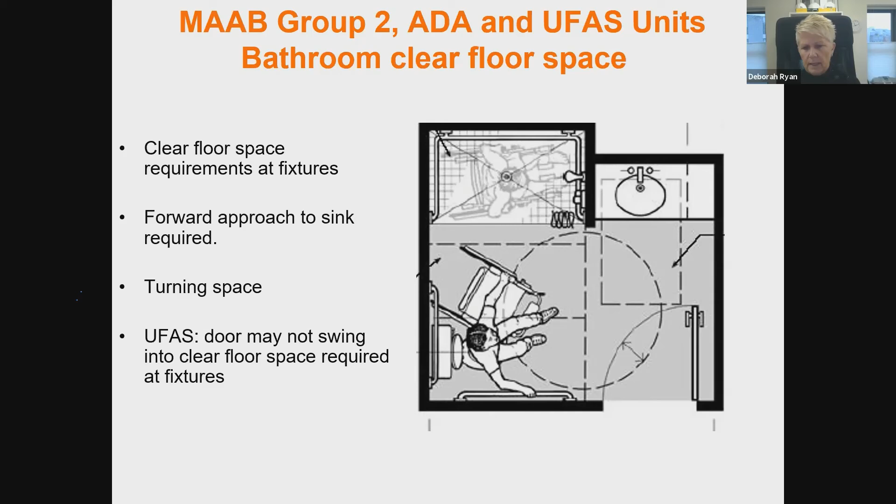Turning space has to be provided in the bathroom. This shows a roll-in shower. You do need wall reinforcement for the later installation of a seat if that person would like that. Under UFAS, the door may not swing into the clear floor space at fixtures, which I think is similar under the AAB. Although the AAB does have the adaptability allowance of doors to swing in if they can be later modified to swing out if need be.

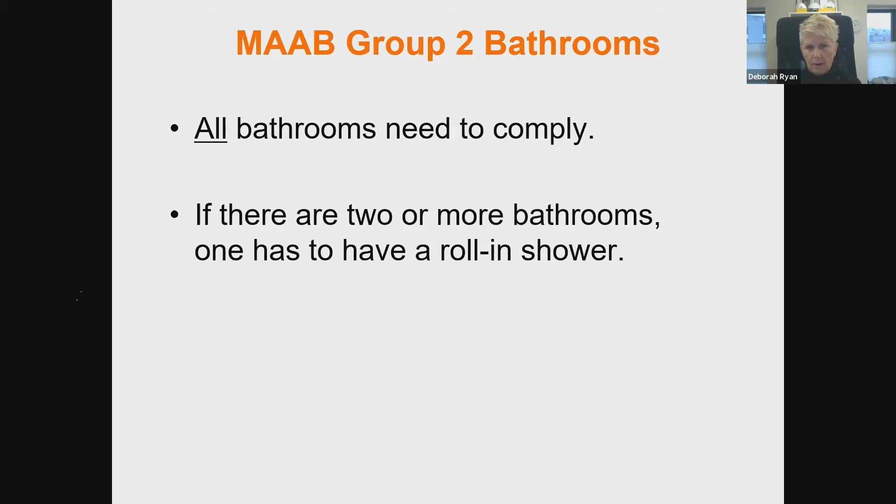Under AAB, if you have 2 or more bathrooms in a group 2 unit, they both must comply, but one of them must have a roll-in shower. So if you have 2 bathrooms, you can have a tub in one, but the other one has to have a roll-in shower. And same requirements, just wanted to pop that in again. Same requirements for reinforcement for the later installation of grab bars.

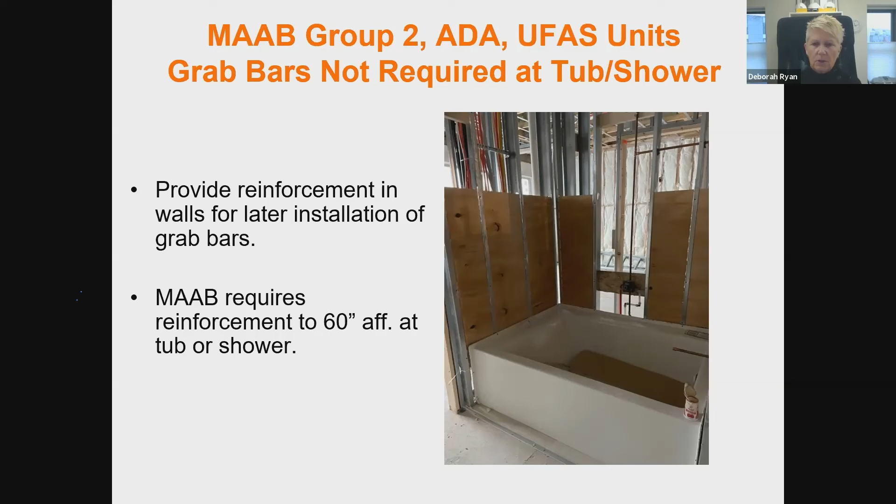I just want to make one call. What I see sometimes is that some of the walls that come to the site have the reinforcement in, and then the plumber comes, takes the reinforcement out. Whoever's on the job, you want to make sure that it goes back in. Sometimes it sits on the floor and somebody may forget to put it back in, and then sheetrock, and then you don't have the reinforcement. So someone really needs to be on top of making sure all the reinforcement goes back in.

A little bit about these larger kitchens with the U-shaped example. Things that are a little bit confusing is that ADA and UFAS both require 30-inch minimum counter space with knee and toe clearance, or capable of providing knee and toe clearance. And AAB requires these 15-inch minimum counters that are next to the refrigerator and the cooktop and the sink, and those can overlap. And we're going to get into a little bit more detail here.

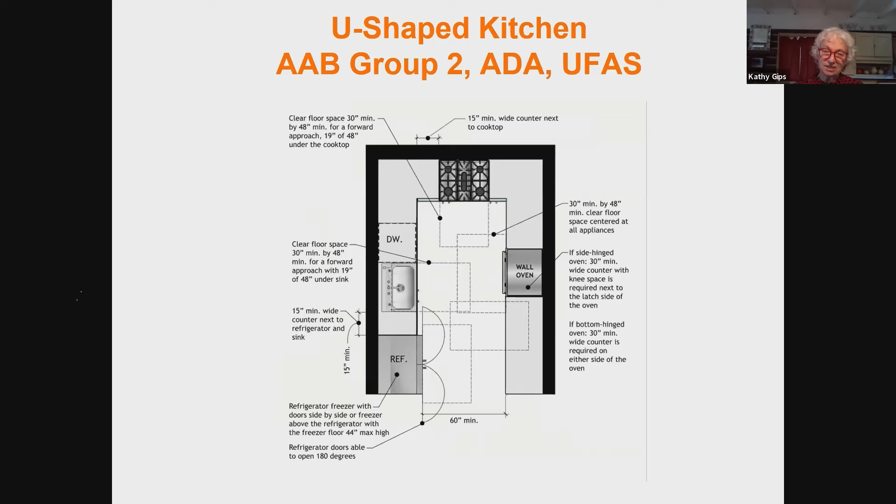We talked about the refrigerator. It has to be capable of being opened to 180 degrees. So unlike group 1, there's no specification that if you've got the 30-inch counter next to it, the 180 degrees goes away. It doesn't. It has to be able to be opened to 180 degrees. And then other things that are required, again, the walls capable of supporting cabinets, so the inside surface can be located between 42 and 54. Outlets and controls that are over counters, 46 inches max.

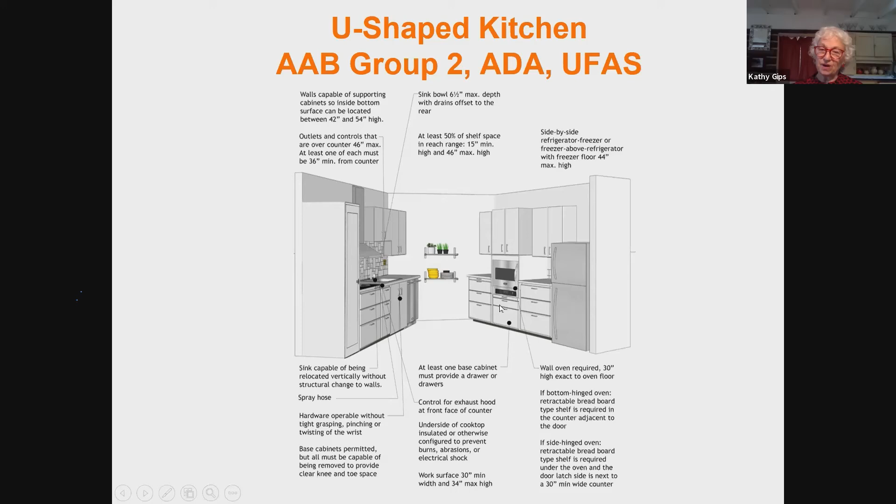Deb's going to talk a little bit about the shelf space because that's a big issue. Sink capable of being relocated vertically without structural change. Spray hose we'll talk about in a minute. And then just to point out that under group 2, at least one base cabinet has to provide a drawer or drawers. So that's important. But we'll go through some of those things now, Deb.

Yeah, things to look out for when you're looking at a group 2 kitchen. The dead giveaway is the wall oven in a group 2 kitchen, because you don't see those in a group 1 kitchen. The floor of the oven is an exact dimension of 30 inches, and the controls need to be a maximum of 54. Also, you need to have a retractable breadboard adjacent. If you have a side hinged, it has to be in the counter underneath. And if it's a bottom hinge, it has to be in the counter adjacent to.

In the sink, there should be a knockout for later installation of a hose, unless you have a single lever faucet that includes the hose in it. The cooktop has to be capable of having knee space underneath it. So base cabinets are allowed, but you need to make sure that they are removable to provide knee space. Now, the AAB doesn't necessarily define what removable means, similar to FHA. In some instances it says replaceable, some instances it says removable.

But the idea is make sure you finish the flooring underneath and make it as easy as possible to remove the base cabinet. One other hint is that generally 30-inch base cabinets do not make for 30-inch wide clear floor space or knee space, because you're not taking into account the size of the cabinet. If you have an exhaust hood over the stove or a disposal switch, they should be at the front face of the counter.

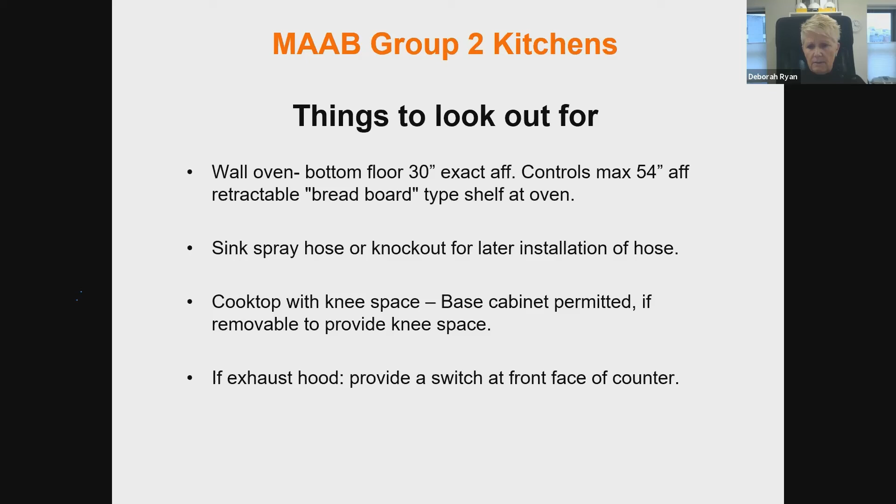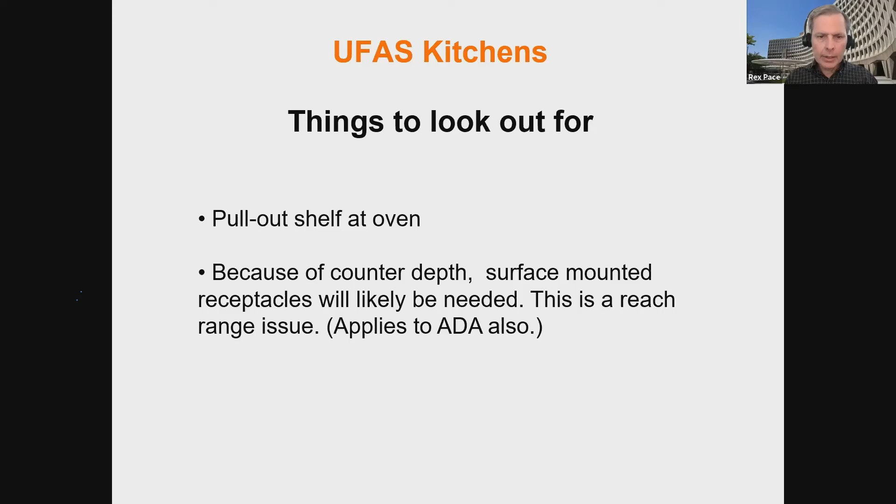Rex? So in terms of UFAS, this is the standard for Section 504, HUD's requirements for the Rehabilitation Act. It does have a requirement for a pull-out shelf at the oven, that's still in there. So you want to pay attention to that. And I would like to say something, really, this applies to ADA too, that counter depth's a big issue in these kitchens. As a matter of fact, it has a bigger impact on the design than you might think

from the beginning. And this is because the cabinets are usually sized at 24 inches deep, and when you put a counter on it, it's going to be somewhere between 25 and 26 inches, the depth of the counter. Well, the reach range under the UFAS standard, which is very similar to the ADA, is you can't reach any more than 24 inches and it be considered an accessible reach. So you're going to have to think of how to deal with the controls, because the electrical code is going to make you put electrical outlets every so many feet over the counter.

So what you're probably going to have to do is surface mount those receptacles so they will be 24 inches or less to reach. They will probably overhang the counter a little bit. You could detail those and put them into the backsplash. That would probably look better, but that depends on your particular situation, what you feel like is appropriate.

You theoretically could mount them in the face of the cabinets, but there are some reasons why people don't like to do that, like the potential for children to play with them, and also because of spills and so forth. So just bear that in mind. That's an important issue to keep in mind, that you can do a counter depth that's deeper than 24 inches, but you can't have outlets that are more than 24 inches to reach. So you'll have to resolve that conflict.

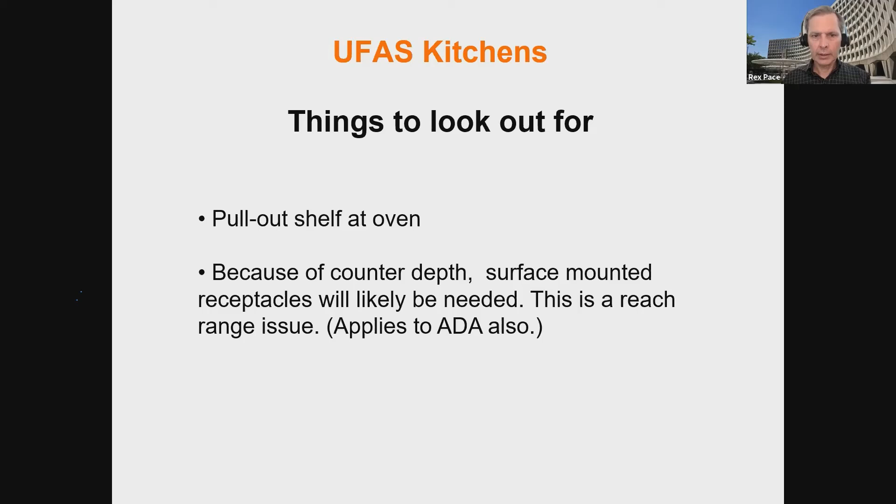Dave, you want to pop in on this? Yes, so the requirements for kitchens in the ADA standards, including those located in dwelling units, include a requirement that at least 50% of the shelf space provided in the kitchen be within accessible reach range. This is one provision that has been especially challenging to meet. We get a lot of questions on it, for example, in terms of what is possible, because the goal here is really to ensure adequate storage space below counters and within accessible reach range.

Really the best and most reliable way to do this, in light of the likelihood of above counter storage cabinetry, is to provide a pantry style type of storage that provides adequate storage space within accessible reach range. Now, in terms of how this is interpreted, it's not really clear in the standards themselves, but we do advise that, when we're looking at the shelf space, it's a linear measure of shelf storage.

We also recognize that there can be some challenges in meeting it. So we typically allow other types of storage within accessible reach range to count as part of the 50%. So drawer storage, for example, which is likely going to be within the same area of accessible reach range below counters, can count towards meeting this 50%. Great.

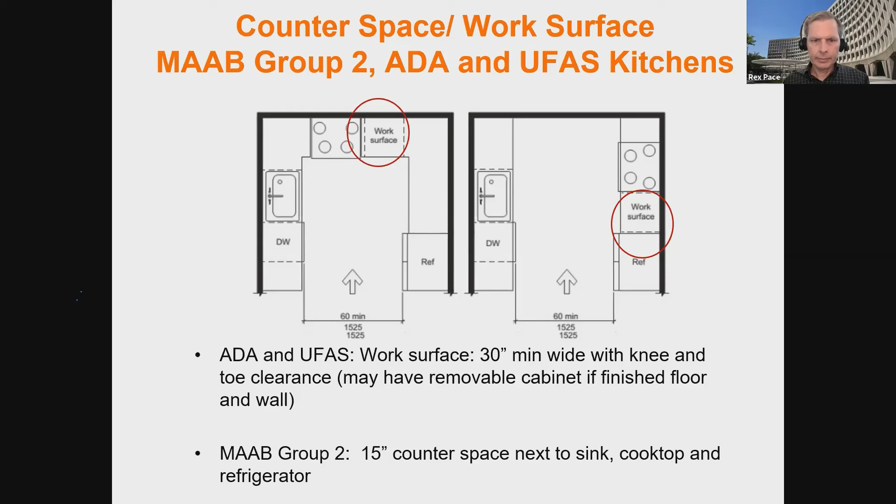So Dave, we're moving on to the communication accessible units. Yeah, so the ADA standards require 5% of residential units to be mobility accessible. And in addition to that, they require at least 2% of the units to have accessible communication features. And these features would include, if you have a public use system to gain entry and communicate with a residential unit, that system has to be designed to be capable of supporting TTYs or telecommunication devices that are used to provide access for people who are deaf or hard of hearing.

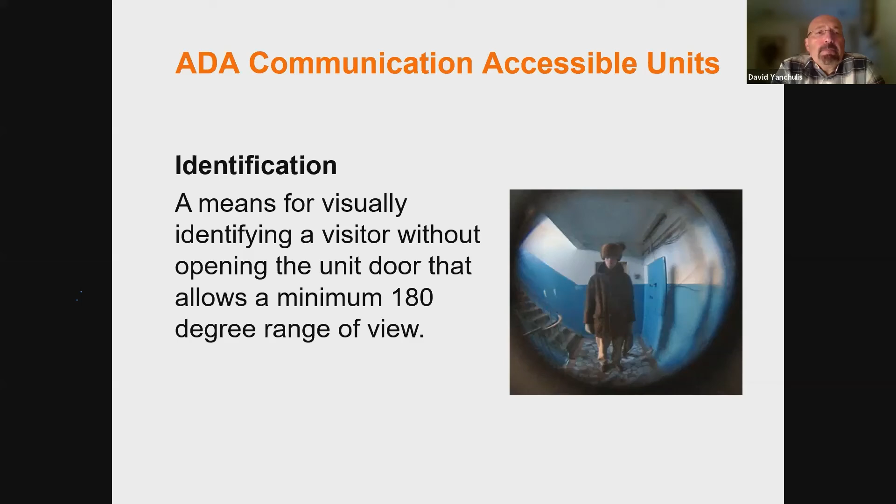We also require that in the 2% of units there be a means to visually identify visitors without opening the door to a unit, so through a door scope or peephole, and that this provide a full range of view, 180 degrees outside the unit. Next slide. Also, we require a hardwired electric doorbell to serve these units with a button or switch on the outside. And the activation button or switch would then in turn activate both an audible tone and a visible signal within the unit. And if they're located within bedrooms, then there must be control to deactivate this signal in bedrooms.

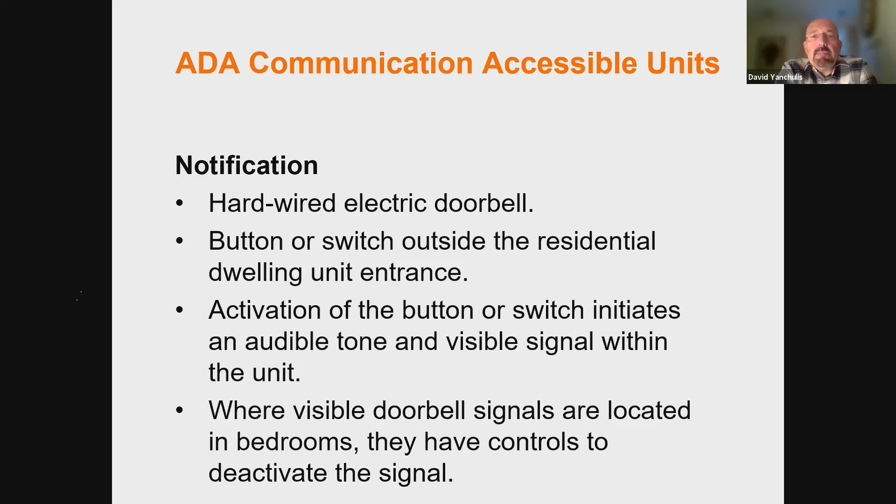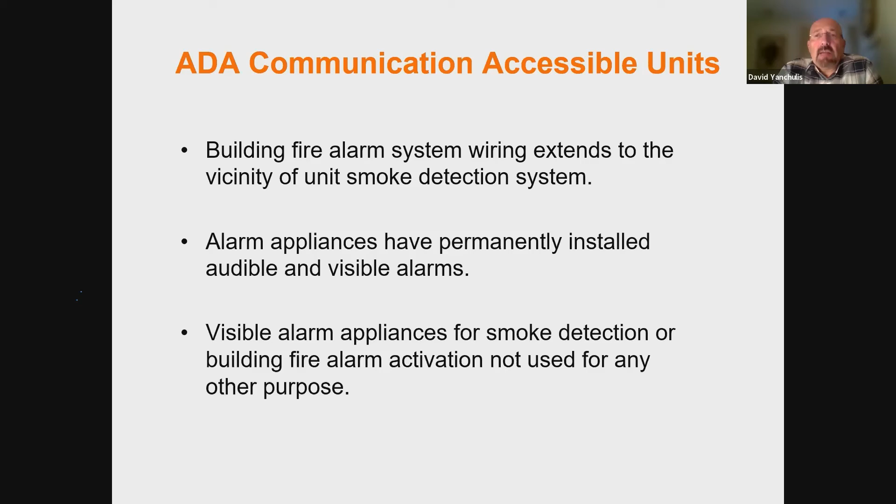Also, we have requirements for building fire alarm system wiring to extend within units if a building has a building-wide system. It must be wired to the vicinity of the smoke detection system within units. Also, the alarm appliances must be permanently installed with both audible and visible signals. And we also require visible alarm appliances for the smoke detection within the units. We also specify that while one alarm can be used for both the building-wide alarm system and the smoke detection system within units, that signal cannot be used for any other type of notification other than the alarms.